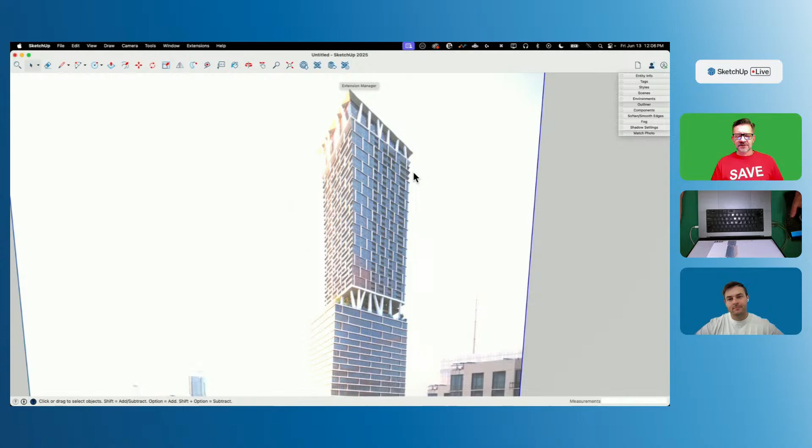So then as we continue up, you can see that this flares out into kind of a crown type thing here on the penthouse level. But yeah, a very cool tower - there's a little bit of distortion on this I think, but we have a couple other images I want to show real quick.

This is more of a ground level image, so I wanted to get a shot of this, like I said, what I'm assuming is the commercial area down here, but you can kind of see how that goes up. Very cool architecture, cool building. I do like these offsets - a little bit of texture rather than, I think we're years past the point where you just do a straight glass facade on the outside of a building. Nobody wants that, that's boring. This offset grid is kind of cool.

So there's a couple reference images, we'll just stick those over here on the side so we can look at them if we need to. Actually, I'm gonna use one of these as a watermark - I'm just gonna throw a watermark up here on the left.

To put a watermark, and I haven't done this for a while - if I go into my styles and edit, this second to last tab right here. Looks a little bit different in Windows but it's a very similar layout. The second to last tab is watermark. In here I can hit plus, and then on my desktop I can grab the image I want to use as a watermark and open it. And that shows up, that's good. We're going to stick it in the background.

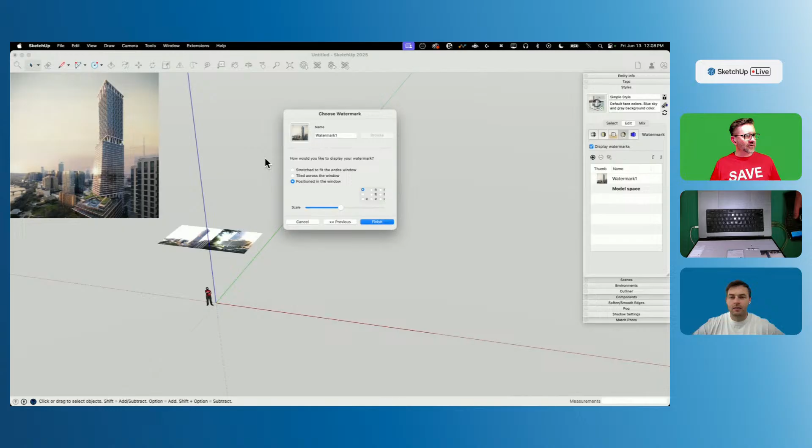Where did it go? That was interesting, I guess we're doing overlay, background - yeah, of course I'm doing overlay. I want to be able to see it all the way for sure. I'm going to position it in the upper left corner, and make it not huge, but something I could glance at and go, okay, that looks about right against my model. So it is an overlay, it will cover up my model - see, my stuff's going back behind there as I move around. But if I was really worried about optimizing space, I'd probably go in and chop this down a little bit.

I don't need all this extra space, but we're good for what we're doing. Yeah, there we go.

I'm curious how you're going to approach this, because at first when I was looking at the skyscraper, I was thinking we have a bunch of floors on top of each other, so we could probably just make a couple components and stack them. But the tricky thing is these shapes are concaving upwards and it's interesting. So what are your thoughts?

There isn't a single floor that's the same shape. This is going to involve arcs.

I think this is a model where level of detail would play a very important part, because I see a way that you could do this. I could probably finish a version with the proper geometry in about 10 minutes, but it wouldn't be detailed—that would be like projected textures, cutting some corners. To get the detail in, we're gonna have to get creative and possibly use an extension or two.

I have some thoughts, but I don't want to ruin it. You've got to stick around for the whole stream to find out. That's how they tell you to do it in YouTube school—promise something amazing at the end. You won't believe what happens next.

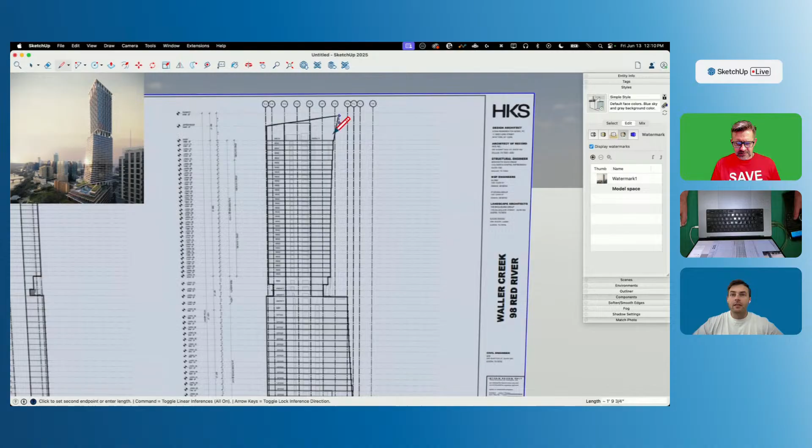Matching some texture sizes. I don't actually need dimensions off here—what I really want is just these two images. What did you say was the total height of this building? It's 1,022 feet.

1,022 feet. So I have what looks like the ground plane right here. I'm going to draw an edge from here to here, take these and put them in a group, go into that group, and measure that edge from here to the other end.

1,022—yep, that's right. 122, that's missing a zero. 1,022 feet, enter, resize the group.

So now these images are full size, and I can believe that because look at 6'2" Aaron right here—he does not stand up to that. That seems believable to me. Okay, cool.

I don't actually need that edge—I just wanted something to measure off of.

All right, so I'm going to take this—I did some stuff to it already. Better come in here. We don't actually need it in that second group, so I'm going to explode that, and turn it back to flat because that could cause some pain in the future. Here we are on red axis—okay, they're flat. All right.

Now what I want to do—you can see here if I look, this side is straight, with an angle cut right here, and then this straight side has that arc going up. It's shallow, but as it goes up, maybe these two are the same, but mostly every one gets bigger and bigger all the way up.

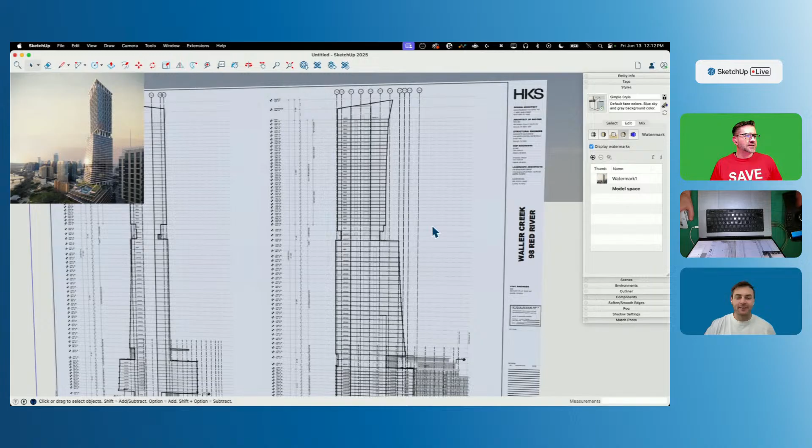Let's be honest, Austin's great and all, but there's not a whole lot to see out there, so I don't need to be too high up. Apologies to anybody from Texas—no, I'm kidding, I really like Austin, I think it's a fun place. Great food scene, good music, good college atmosphere. It's a fun place.

All right, so there's a couple ways I'm thinking I could do this. What I will probably do is use solid tools to create two profiles.

We'll create a profile from both sides and then extrude them. Then we'll overlap them and make one solid from those two outlines. I think that'll be the quickest way to get started with this.

Then we'll talk about this grid, because I think the easiest thing to do with this grid is going to be to take that grid and model it once, then cut it into the different sides, and use something like joint push pull to then pull the sides out. I think that's going to be the quickest, easiest way to do this.

Yeah, I'm going to see how that works. No promises. Actually, yeah, I'm promising that's what I'm going to do, but I don't promise it's going to work. Well, we'll see. But joint push pull is a good call, I feel like that's a good one. I should see if I have that installed. Hold one moment please. Yes, I do. Okay, we're good, let's move.

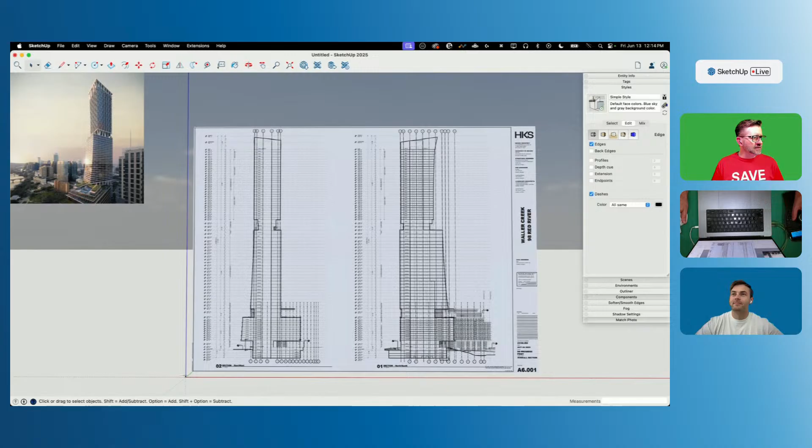All right, first thing I'm going to do - well, I've already done some first things, this is my next first thing. I'm going to change the color of my edges to something that stands out amongst black and white, so I'll grab this bright red color because I want to come in here, and I'm assuming this image - and it's not a high quality image...

You guys might already see that these points are going to line up pretty well. Nope, ish - look at that, right off the bat something's not quite lining up. Okay, so it looks like that side is higher. This may actually be how it is, because I might have a section here and a lower part here, so we'll play with that and figure out how that lines up. It'd be a shame if this was straightforward and everything worked.

All right, so here we have this bigger chunk - you're not going to earn your ice cream if it comes together easily. That's right, what's the deal there?

All right, take this one straight across, see where this hits. Okay cool, so that's nice, that stuff all lines up. And then down here... right, and then we're going down to, this is the ground plane, so I'll get this in. This is how far we're going to model down to. And then see, I got a step right here - fairly big deal, yeah, okay.

So all those edges, all those locations line up vertically. That's good, that's cool. So right here I'm going to start, pull it straight down. I'm going to go straight down rather than snap to the end because this end is kind of arbitrary, so if I stay on the blue axis they'll cross and I can get rid of those two pieces. I'll do the same thing here. I'm just going to follow this profile for right now and see what happens.

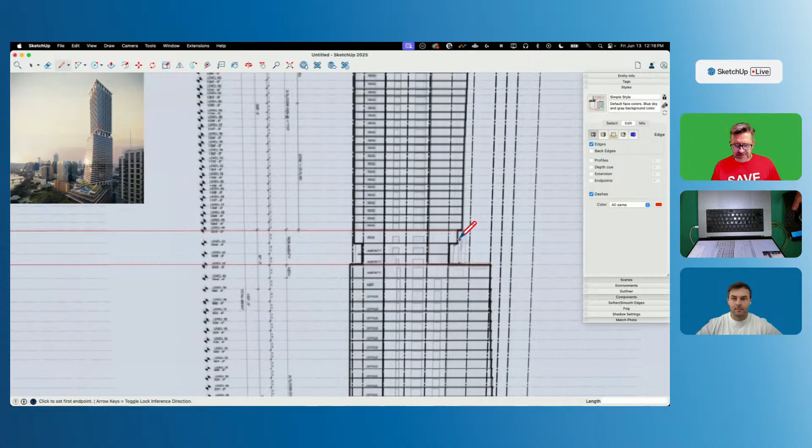All right, and then down here I'm not really sure - obviously there's steps here, so maybe I'll go do this side too real quick. I'll take this side up from here down to here, from here up to here, and then it goes like this, and then I'm going to use an arc from there down to there, and then just kind of - it's not a crazy deep arc, but there's a little bit there.

Okay, there we go, that was nice. Cool. Why didn't this close over here? What's the deal?

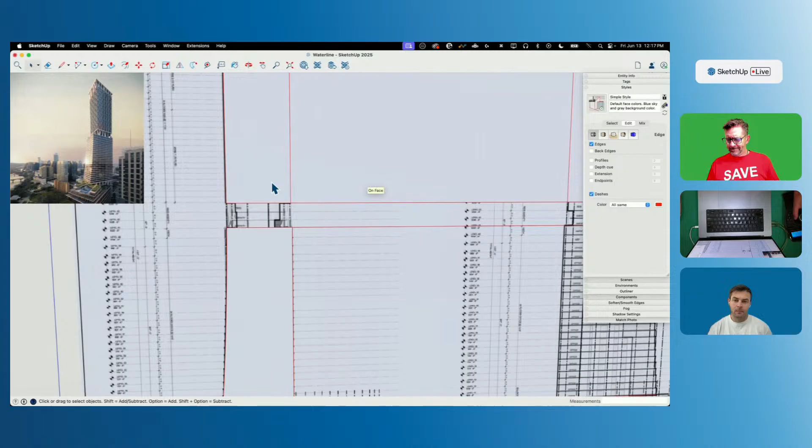So the reason this isn't straightforward to me is I'm kind of wondering if I need to be putting some of these actual levels in. So come into right here, down to here, here up to here, and then taking that line straight on across. I can see this little step out right here - I don't want to lose that.

Speaking of determining the simplicity or complexity of the model, John Ross in the comments is asking: is it truly an arc on the side of the building, or is it that all the individual floors are slightly stepped out?

What do you think about that? I do think that the floors are stepped. So I do actually think that's what's going on here, but I kind of wanted to see what would happen if I continued modeling this way anyways. If I was going in here, it does look like they step a little teeny bit each time, which I guess we could still do. But that will... okay, so to do that, again, this comes down to level of detail.

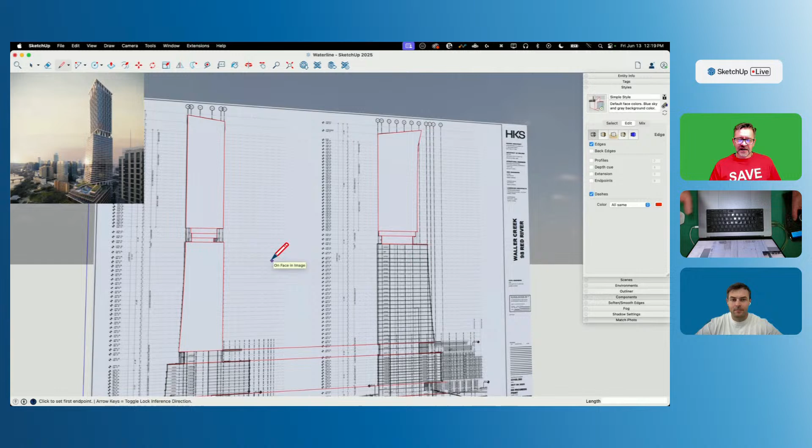In our hour and a half model, I'm not going to detail every level differently. I just don't have the time and it would be boring. So what I could do is determine the exact height of each of these floors, and make the step on both sides so that when I push the two pieces over each other and make the solid, those steps align perfectly. Because if they don't align perfectly, I'm going to have a big problem. That wouldn't be too bad. The problem would be...

Yeah, I guess we go for it. Well, one thing you could do is draw a rectangle essentially for the top floor, and one from the bottom floor, and then divide it by the amount of floors, I guess. That should give you a pretty smooth result.

Yeah, so if I go from here to here and here to here, right? That cuts it. So now this edge and this edge are the same. And in that I have... oh, I'm gonna lose count. 1, 2, 3, 4, 5, 6, 7, 8, 9, 10, 11, 12, 13, 14, 15, 16, 17, 18, 19, 20, 21, 22, 23, 24, 25, 26, 27, 28, 29, 30. So hey, there we go. Nice, does look like a round number.

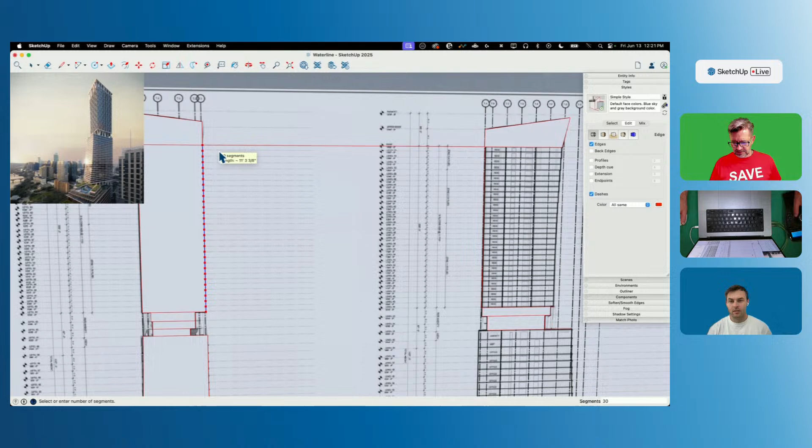These are not symmetrical. Maybe this is a maintenance building or a less expensive floor. It looks like they're different, but that could be the image too. So I'm gonna say there's 30 even floors for this. I'm gonna divide it. I can slide this around and see what 30 looks like. Easy 20, 30. That's pretty close to my dots. All right, I'm gonna go with it.

So now what I could do is take that over to where I want that first one to be. And I broke the wrong one. I really should have broken this one instead. So let's just do this. I'll grab that line right there, option copy that to right here. Because this one's the same, so I don't have to break this. But then I can come over here and put each one in like this.

Okay, this is a speak-amongst-yourselves time, because while you do this, let me share some fun facts about this building. One thing that's really cool about this building is that the structure was designed in Tekla, one of the modeling softwares under Trimble's umbrella. Trimble Connect was used very heavily to collaborate on the model and identify issues and solve them before development even began. So that's pretty cool. Yep, love seeing our stuff get used. Exactly how it's supposed to be used. That's awesome.

Probably to a degree more accurately than what we're doing right now, but I would think so. I would hope so. I bet they spent more than 90 minutes on it. I'm gonna hang my hat on that. Otherwise the residents in the apartment would start talking to each other and be like, well, my ceiling's like 10.67 feet tall, and oh, yours is 15? Wow.

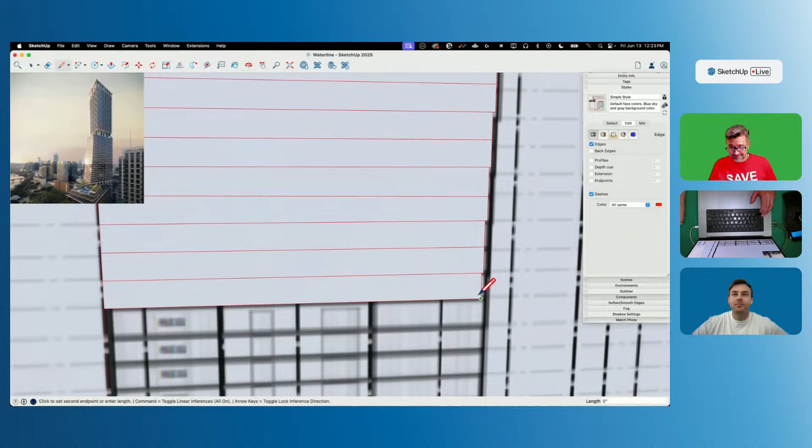But yeah, so the building is supposed to be finished in August 2026. And like we said at the start of the stream, it's going to be the tallest building in Austin and the tallest building in Texas, and the tallest building in the southern United States until the Waldorf Astoria Miami is complete. So maybe we'll do that one next. I don't know, we'll see.

Nice, all right, that made light work of that. That was not as bad as I was thinking it'd be. All right, I'm gonna get rid of these edges right now because I just want that cut.

So I could do the same thing over here. Let's see, I got 1, 2, 3, 4, 5, 6, 7, 8, 9, 10, 11, 12, 13, 14, 15, 16, 17, 18, 19, 20, 21, 22, 23, 24, 25.

So you can see they are pretty close at the bottom, but as we come up, we have some different size steps. So I'm gonna double check that. 1, 2, 3, 4, 5, 6, 7, 8, 9, 10, 11, 12, 13, 14, 15, 16, 17, 18, 19, 20, 21, 22, 23, 24, 25.

Yeah, it kind of looks like it's getting increasingly taller each step. Well, take that, rich people, you don't get your big big floors this time. Yeah, but tall ceilings, what are you gonna do? That's right.

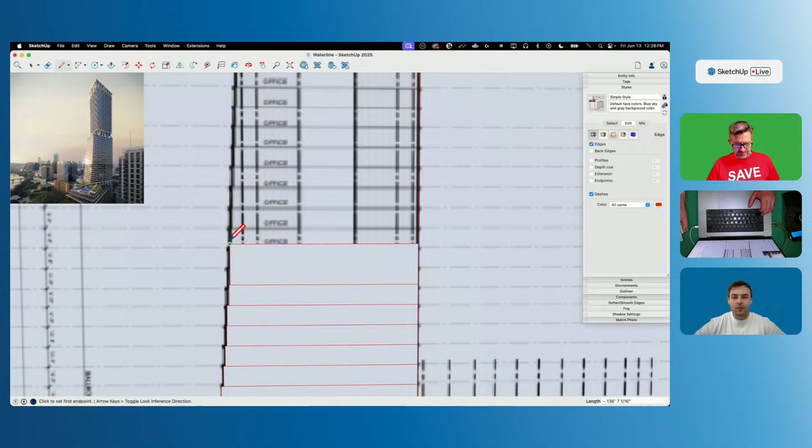Well, I guess it's more interesting to talk a little bit about what you're thinking of doing next. So once you have all these individual floors built out, you essentially have the side profile or the elevation of the building. I'm curious, are you going to push pull everything manually? Are you going to duplicate it on both sides of the building so that it's a hollow building on the inside? What are you thinking?

So I'm thinking I'm just gonna get a solid plane here, right, an outline. One, two, three. And then I'll use solid tools to kind of get the overlap. I can't remember what that's called. Is it the split? I think so.

I might be consolidating some floors together here, but I want to get the profile from both sides rather than push pulling a bunch of stuff one level at a time. Like I said, that's what I did not want to do.

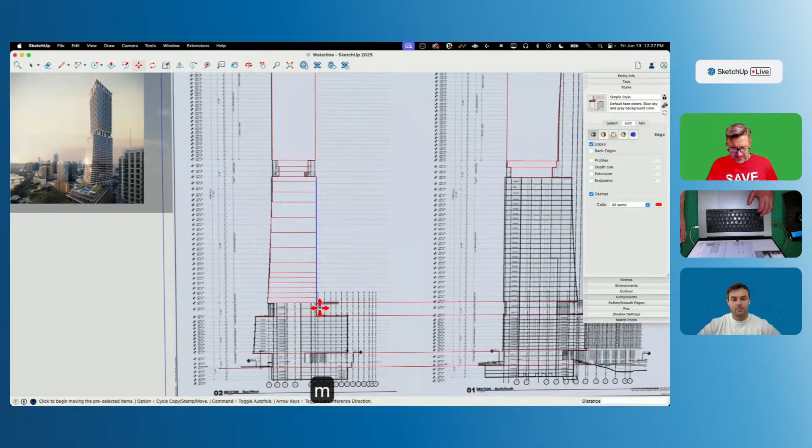All right, there we go. So something - whoa, whoa, whoa, whoa. Actually, undo that because I want to use those same edges as inference or as reference. I'm going to go like this, option copy that right over to here. And then I got to do the same thing, unfortunately.

All right, so start at the bottom where it's bigger. But yeah, I was thinking because we've modeled this way before, usually it's a little more organic or curvy shapes where we can kind of model a top view, a front view, and a left view, and then overlap them all and keep the piece in the middle. Something similar to that. I think we've done animals or motorcycles or a Vespa or an airplane maybe, with the same process to just get that preliminary massing done rather than trying to figure out how this thing works one piece at a time.

Yeah, that's an interesting approach actually, didn't think about that. So you'd essentially be putting all of the faces together and then drawing like a massive rectangle that sits in between everything and then using the solid tools to cut the remaining piece. Smart, that's pretty cool.

Well, we'll see, yeah, we'll see. We will see, folks. At this point, we're more like - hmm, that's an interesting take, let's see how that works. That's kind of where we're at, I think.

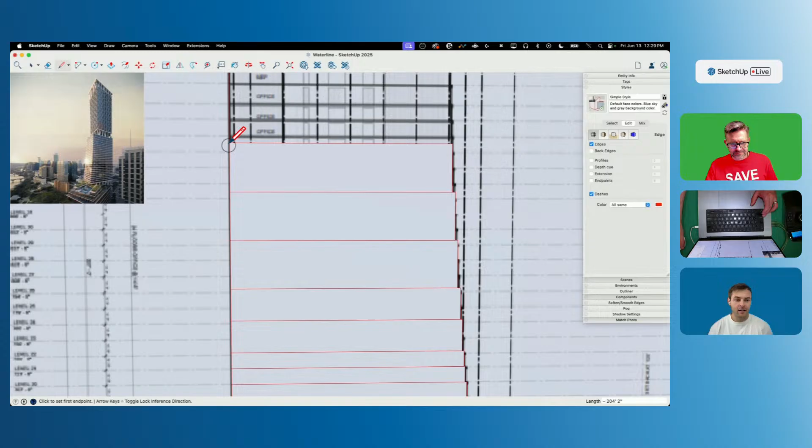Undeniably, it's looking pretty good already. We had a comment in the chat asking if we have a plan view, and I just briefly looked online and I could not find one. So sorry, Aaron. That's okay, I was actually wondering that because of that lower level, which I'm assuming is like the commercial section.

Down here it's weird because it goes a totally different direction, turned like 30 degrees from the main section. I'm really not sure how to do that, so we're gonna really focus hard on this piece and then see how much time we got left. We're gonna let the timer run out on this, probably. All right, so I'm gonna bring this in like that.

Hmm. Yeah, it does. Don't look like I want it to. It's a fairly tricky building though.

It is fitting that our colleague Matt suggested doing this building and then left on paternity leave. Conveniently. That's one way to do it. Thanks Matt, we miss you Matt. Congratulations. Well, it's not officially happened, but he's on baby watch right now, so it could happen anytime, folks. Matt could be babying it up as we speak. We don't know. Stay tuned.

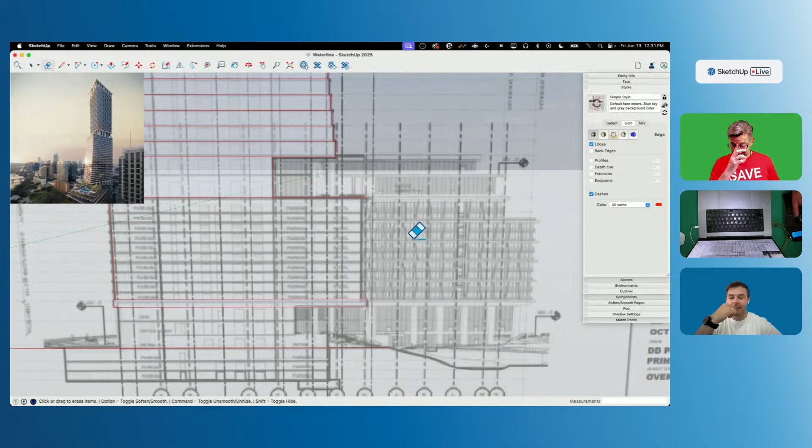Could you imagine the amount of actual plan documents and whatnot that go into this building specifically, and the amount of engineers that had to look at the structural design to sign off on it? Think about what it takes to build a 1,000 foot tall building. I think about the amount of plans that go into a decent size mountain home around here, because when I was doing design work, it was primarily for custom homes in the Rocky Mountains. We would have plan sets that were like rolls this big, and it was a single family home. I just look at stuff like this and, yeah, you'd need a forklift to move those plans around.

All right, so I'm gonna take this down to the ground where what I marked is the ground plane. Yeah, like that for now. All right, and I'm just gonna clean all the edges out so I get one profile.

Beauty, nice. Over here, same thing, I'm gonna take this down. Make sure I'm inferencing down to the same spot. Take that over. I can't tell what's going on here.

Hey, we're 30 minutes into the stream so far. This profile is looking sweet. If I can pop this out in the first half hour, I think we'll be good.

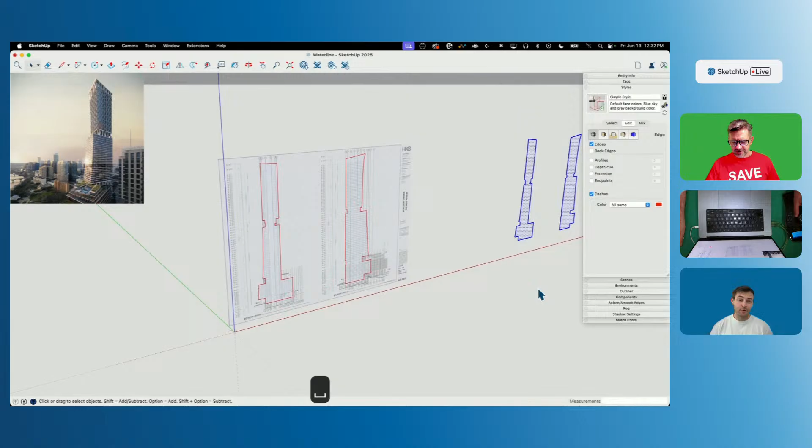All right, so what I'm gonna do is grab both of these and make copies over here. Of course, don't forget to save. Maybe. Look, already done. Nice, good call everybody, thank you very much.

I can't see my shirt, so you guys got to read it to me. All right, so I'm gonna take that one. Actually, well, I ended up with a bunch of edges here, so I might do this. I might grab this and weld it real quick, but I don't know, is that gonna mess with something? No, I don't want to do that.

Unweld, bring it out, and then I turned X-ray on at one point because I was tracing off of that face there. All right, that's good, that'll work, I like that. And I'll take this one, same thing, just pull this out. And then these are actual steps, these aren't.

All right, I think that's everything. So I'm gonna grab each of these, triple click, make a group. Triple click, make a group. All right, and I'll take that group, spin it 90 degrees. And this again, it's all at the same height. It lined up horizontally, so all I should have to do is slide this like this. All those floors should connect right together.

So right here, that lines up. Here lines up. This deck lines up. Down here, that's the same height. That's the same height, this little step right here. Let's scoot it back just a little bit so we get a better overlap. This little thing right here lines up. Perfect, so as far as I can tell, that's good.

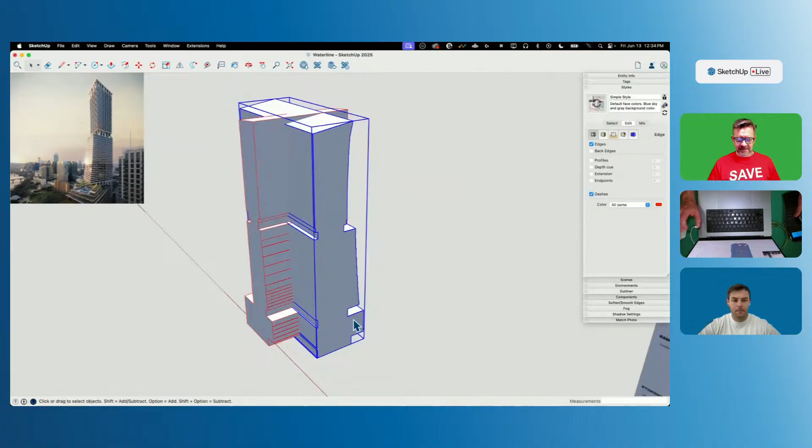I'm going to take these two and option scoot them over. I learned from Tyson on this one, it's good to have a backup. About to do something stupid, make sure you make a copy and save. Okay, that being said, let's do something stupid. All right, I think it's intersect. I think what intersect will do is give me just the geometry where the two solids overlap. So I'm just going to hit it.

There we go, look at that. Yeah, beautiful. All right, so let's look at what that did. It did that. That's pretty cool.

That looks good. And you can see that the roof does slant, which I think it does in real life too. So nice job. I'm guessing because we only had two sides, we could only see two of the sides. I'm guessing something more like, if I come in here, I'm thinking it's probably more like this, where it comes down in two angles, something like that. But that's a pretty nice, cool looking building. Agreed.

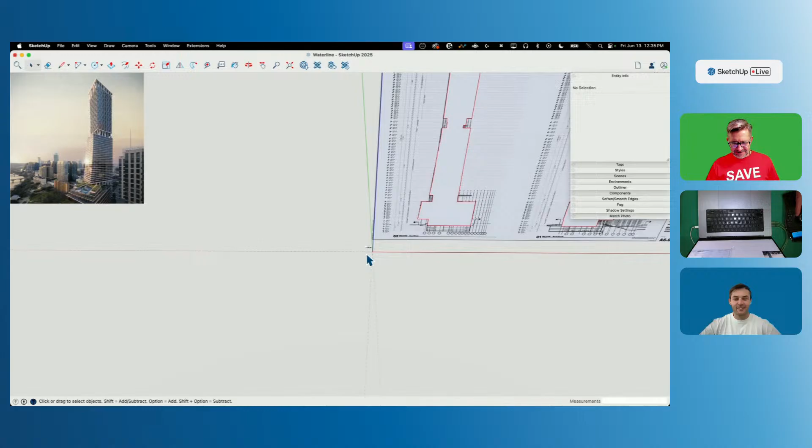We will ignore the fact that the bottom of the building juts out at a completely different angle, but I'm working on that with my brain, trying to reconcile this. What? I don't even know how that happened. Yeah, where did my... consider it a design flaw. I'm looking for my reference images. They are here, all right.

Let's scale these up so I can at least kind of look over at them. All right, I'm going to grab that, that's a new solid group. So if we look at this thing, it looks like that's the angle we're looking at it from. Yeah, this is where this cut down here is an orthogonal cut against a non-orthogonal building, so that was kind of chopping through like here and then here. So that's where we got that weird chunk on the bottom.

I'm kind of tempted to say let's just knock this chunk off. Yeah, and let's model this piece from here on up. If we have time, I might go searching and see if I can find some better images of what's going on down here. I think it's a cool section, but like I said, everything I found was about the tower and not so much this lower level. Which I think is okay, because I think we got plenty to do here.

All right, let's detail this thing. Trying to think if I really...

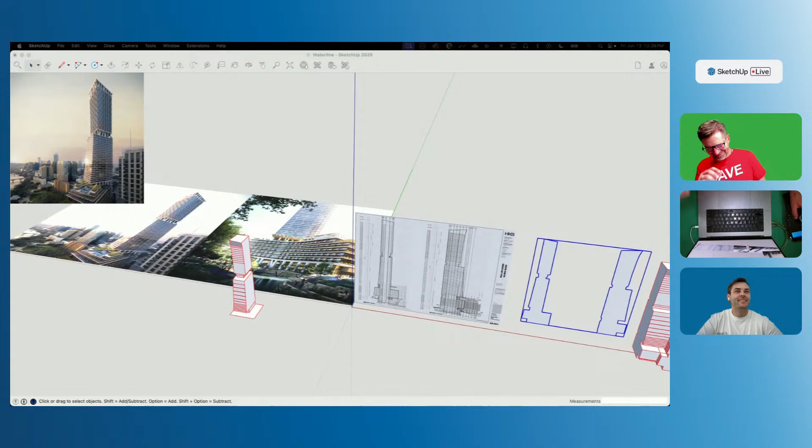Um, yeah, let me... Forums.sketchup.com, official plug. Just briefly create a forum account real quick. Oh I know, boy, I know. Hey, whatever gets it done, man. That's cool, that'll work, all right.

Let's look at a couple of things. So top down, it does look like we have this inset here. That looks right. And then we got this cool non-symmetric post work going across here, holding up this middle mezzanine section. That's awesome. We got the same thing going on up top, but I did not model that.

So I'm kind of thinking what we'll probably do is I'll come in here. I think at this point I got to get rid of these red lines too because they're making me feel like I did something wrong. I feel like I'm being shamed by the color of these lines. So I'm going to come in here to my styles and just set them all back to black, or licorice if you will. All right, so that looks cool.

And then I think, kind of wondering something about this right here. So these are not in plane. You can see if you look down here, these two points end up lower than if you connected these two points. So these two would have to vertically move up in order to force this all into line.

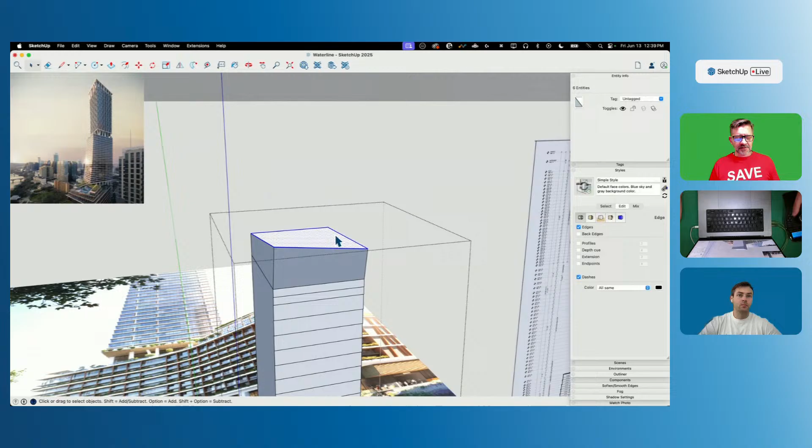Now I actually have a tool that will figure out how do I make that all one plane. And again, I admit right now, I'm not working off of a set of structurals or architecturals or anything else. I'm straight up trying to make this look good as far as I could think how it should be. I don't see a reason to really have a break right there. It's already sloping, so I want to try to get this as a flat plane.

So a tool that I use every once in a while, it's part of the extension Vertex Tools, which I wonder if I have it installed. I'm pretty sure I installed it, yeah, Vertex Tools. And there is a tool in here called Make Planar. And what Make Planar does is it takes 4 or more vertices or ends of edges and puts them all so they're in a plane.

Not necessarily flat to the blue-green plane or the red-green plane or anything like that, but all in plane with each other. You can see how this is up high, I can see that poking up past. If I hit Make Planar, it's going to shift them. There you go, so they are all in plane now, and I have one flat surface there. If I look at it, there it is, perfectly flat.

The reason I want to make sure I do that is because I'm going to want to take these edges and push them in to make this recess where I can put my posts around. That's going to be a lot easier to work off of a flat plane rather than what that thing was before.

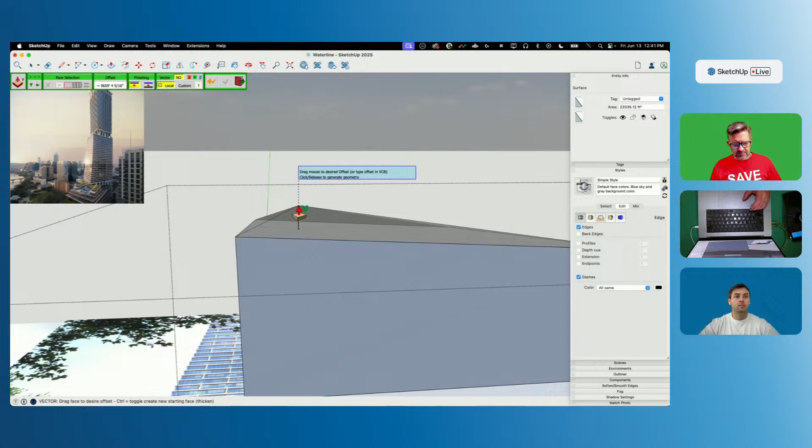So I think I'm going to grab this, we talked about it, I'll go ahead and use it. I'm going to come in here to Tools, Fredo Collection, Joint Push Pull, and I'm going to do a vector push pull because I want to pull this straight up. Normally a push pull is always 90 degrees to the surface, normal to the surface. So whatever angle a surface is at, pushing something off normal is how push pull works. But with this, I can actually grab a surface and pull it and tell it where to go. I'm going to go straight vertical, so that's going to go straight up instead of normal to the surface.

See it there on the edge? See how this goes vertical? And then let me bring these other pieces in slightly.

Might as well just bring that toolbar up. Let's go to Tool Palettes and find Joint Push Pull. All right, I'm going to joint push pull a couple of these pieces in. Oops. Yeah, I do love joint push pull.

It's super helpful. Kegi in the forum posted the same photo that I am waiting for approval to post, so he beat me to it. But yeah, it's a fantastic image that really shows, I think, the design from a nice isometric viewpoint.

Pull this in, yeah, we'll say like 6 feet. And I'm making a little bit of an overlapped mess here because I'm pushing in geometry that was never meant to.

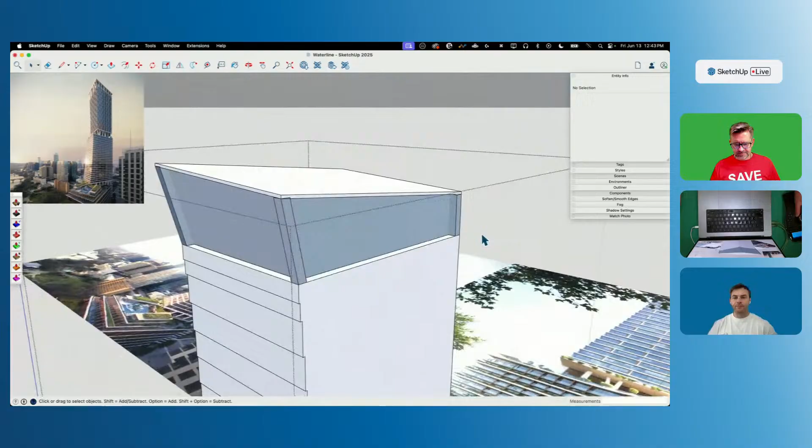All right, so hey, I made a mess. Columns, I made corner columns, I made a mess right there. But I'm okay with that because I think cleanup's going to be pretty easy. I think what I can do is just grab all of this, right click, intersect face with selection.

Any place that any of those two overlap, they're going to get a face now. I think I can just come in and chop off whatever's on the corner like this. And we'll be back. Whoops, too much. I deleted too much, there we go.

And then I think I might have to do some cleanup at the top. I may have just actually made a terrible mistake. That is always possible as well. Oh, that's how you learn. You'd think. This is not the first time I've done this, so, oh man, it just keeps getting worse. I'm gonna back up.

Ripcord. Okay, let's try that again. So the issue is I can't. The reason I'm having an issue, I'm having a moment here, is because basically nothing's in plane, it's all out of plane. It's not a bad thing, it is what it is, unfortunately. So I'm going to try this.

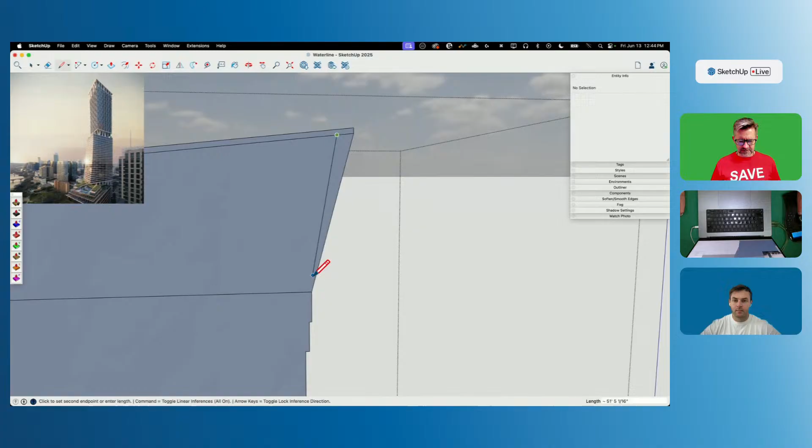I'm going to come this way 6 foot, and I'm going to draw an edge right here to here, 6 foot. I should have, there we go. So there we go. And then I'm going to come over here, do the same thing. Come this way 6 foot. Come this way from here to here, 6 foot.

I don't know, I'm experimenting at this point, I'm not sure what's going to happen. So I'm going to get rid of those faces, and I'm going to tie these two together. And I'm going to flip this way and tie this together. Oh, that. And it didn't close because of that angle. I'm actually creating, I'd have to create a face like that.

But before I do that, I'm going to step back in here also. I'm going to come this way 6 foot.

There are situations that go against your whole ethos, you know? That's the problem. I gotta figure out if I want to stay on brand or make things easier on myself. You know, that's what I gotta live with here. Gotta play this whole thing.

That's right. This is one of those spots where, like I said, if I was actually designing or doing any kind of design work with this thing, I'd hope to be working off more information than an isometric render. But it's cool, it's not painful. These extra couple steps didn't hurt to do.

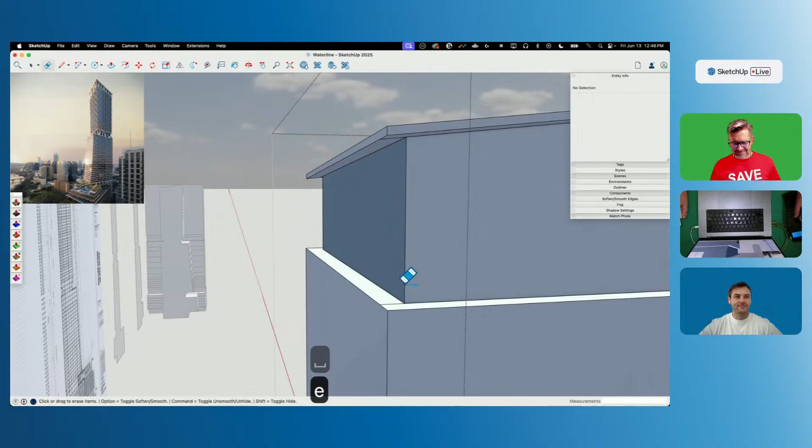All right, so there we go, that looks pretty good. And then again on the pieces that didn't line up perfectly, these weren't perfectly straight or something like that - that's okay, because I'd probably just come in here, connect these back up like this, and then smooth those back over. And I got my recessed area there.

There we go, I'm struggling a little bit. I don't know if you've hit this yet, Justin, but depending on the environment I have set up, the sun hitting the white face versus it being ambiently lit through the color of the sky looks pretty close to the backside. Yeah, it looks like the faces have been reversed.

Well, I'm a little surprised that in an instance like this you're not turning off the environment, but I guess you just love that cloudy sky. I just like it, I just like the colors that come in. I know I'm working on white right now, but I like the way it looks. It's just what it is, that's just how I go. This is me now, this is just what I do. That looks pretty cool.

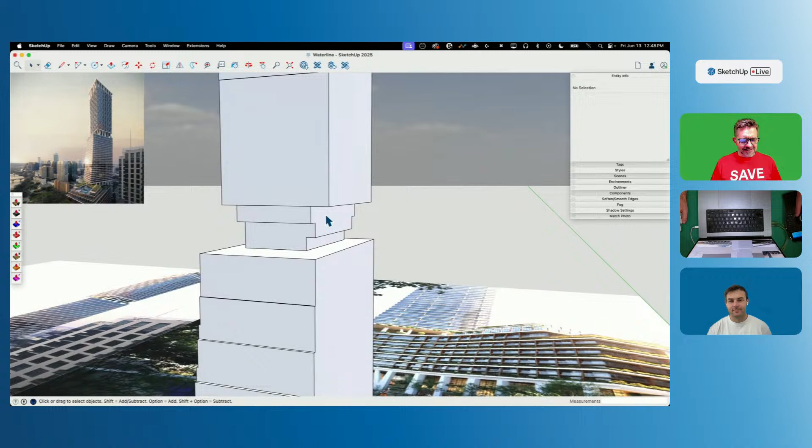So I'm gonna do a couple other things here. Maybe let's work on this web - I'm gonna save this, this is closed in. So we have this webbing shape, I'm calling it webbing, it's not actually webbing, but it's this lattice work, I don't know what you want to call it - this stuff. I want to get that on the side of the building.

So I'm going to make a single component to start with. That component's going to go - I'm going to come here, and what's our floor? 11, so I'm going to come down 12 inches. I'm going to take this back this way, green, going long both directions. All right, come up 12, down here. All right, there you go.

Grab that, make it a group temporarily. And I'm going to option copy that down below. All right, so that should fit - this is the biggest side of the building, so that should fit everywhere as I need it.

All right, then I'm going to look in here and see, okay, which side is this? That's this side, actually - 1, 2, 3, 4, 5, 6. What, the smaller side has less? That doesn't seem right, that's probably just a rendering thing. I'm going to do as many as I darn well please - how about 4? Okay, four-ish, this is an interpretation.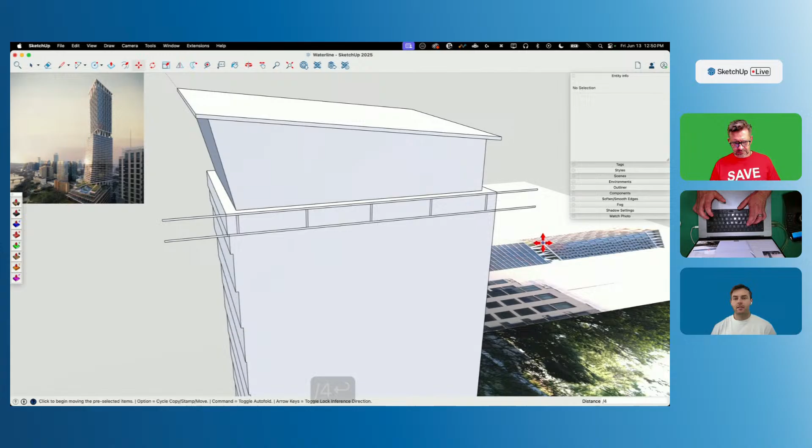There you go, all right, that looks okay. Cool. Now I'm gonna grab this, this, this, this and this, and option copy it straight down. I'm gonna come to the middle right here and slide it over. I actually have a middle point here, so I'm gonna do this.

I'm gonna make temporary geometry just to inference, that way I can grab the middle of this point. I can drag it this way to the middle of that. Get rid of that. All right, there we go, that's gonna fit, okay cool.

So now I'm gonna grab all of these pieces and make them into a new group. Go into that group, grab all this, let's get rid of everything else. I don't need to see all this, I just need this, this is all I need. All right, I'm going to right click and explode it all.

This is a pretty simple piece of geometry, so I'm just gonna manually erase some stuff like this. How would you do it if it wasn't a simple piece? There are some, I could probably use cleanup. Cleanup, yeah, I would probably use cleanup. Cleanup will go through and merge all these into one piece.

The issue I run into with cleanup, let me see if I can create my issue. All right, there we go. So see how I left a couple of edges along here? It's still all one piece. So cleanup doesn't go through and make sure any redundant edges are gone, it just erases enough edges so that this all becomes one piece.

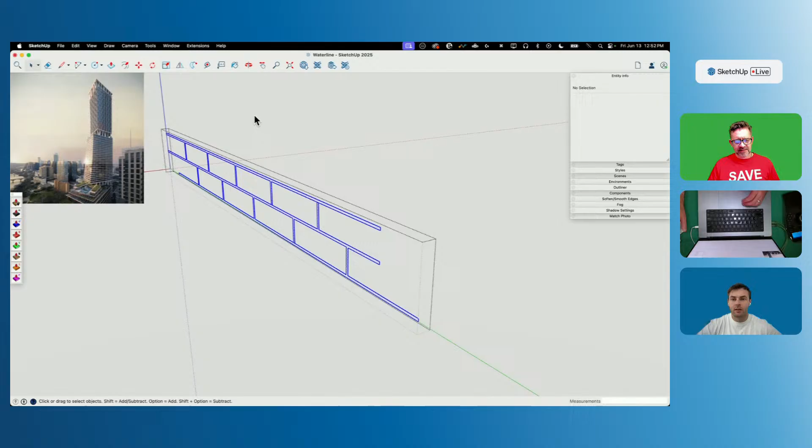So I find with cleanup, it works great, it's a great start, but then sometimes I still got to come in and get rid of these extra little edges if I don't want them. Or the other thing I could do is grab just this face, Command C to copy it, then delete everything, and then paste in place, and that'll bring just the surface back without the extra edges.

I lied, that just came back. Yeah, so I'll just delete them. Okay, I thought I had something cool there. That was interesting, I did not know that would happen. All right.

So this is going to work for the flat sides. These sides over here, I'll have to do a little bit more work, but for right now, I am making things up. So I'm going to grab this one, option, bring it straight over here to this side. Come in here, what I'm trying to think now is do I want to push pull it now.

Or do I want to copy it, group those flat pieces together, and then push pull them? If I push pull them now, they'll be solids, so it'll be easier to group them back together. I think I might do that. There's no world where you would want to turn this element you've created into a component.

Well, I mean, yeah, we talk all the time about how components are super important and why you should use them. But let me show you why I'm not bothering. I'm going to pull this out 6 inches so we get a 3D piece. I'm going to take this one and grab it.

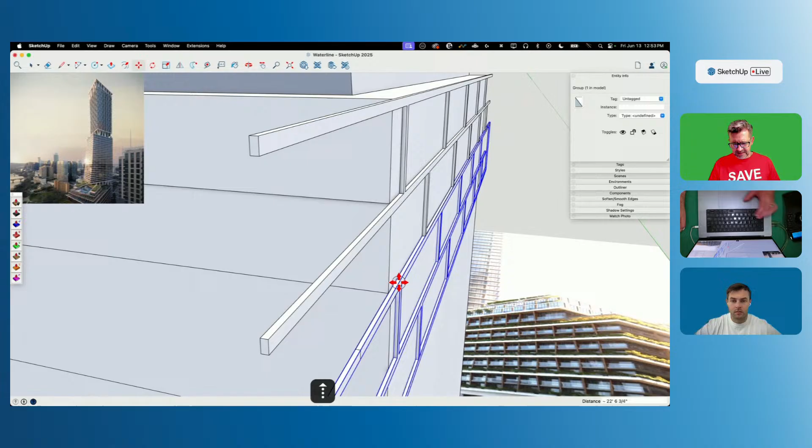I'm going to option shift, or vertical copy down to here. I'm going to say do that 15x. That's close, and now I have them. So the first thing I'm going to do now is take these and outer shell them, so I have one solid.

Oh, son of a gun. Yeah, if I had done that in components, it would have been way easier to fix. All right, I'm going to undo a couple times. I'm going to come into this and take a look at what the problem is.

Looks pretty good, so let's ask Solid Inspector to take a peek. Solid Inspector... I have an internal face, so we'll fix that. All right, let's try that again.

So as I was saying, yeah, it would be ridiculous to make a component 14x. There we go. Because the first thing I'm going to do when I copy these perfectly created solid groups over here is join them together. So we're going to go into Tools, outer shell. Now I have one solid piece there.

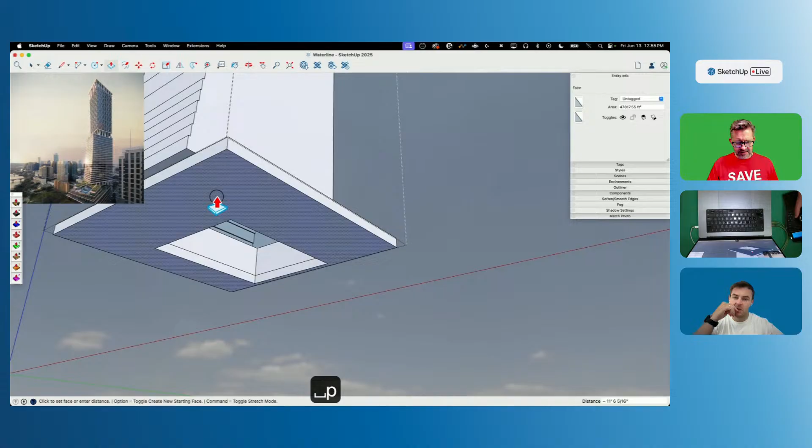I could take that solid piece and, let's get it all the way cleaned up first. I'm going to take that piece and slide it in like that. This is still a solid tool... no it's not, what did I do? Oh, there we go. Here's what I'm doing, I'm going to give this a little bit of a podium to stand on like that. Oopsies.

And then you're going to use solid tools again to basically cut that piece. Exactly, so let me figure out what's going on. I got some loose geometry inside probably. Yes, not one but two internal faces, twice as many. Okay, and then I'm going to say...

How do I do this backwards? Okay, here's what I'm going to do. Make a copy of this, slide it over here, and then take these two and use solid tools intersect again to get me just that cut off piece, which I should now be able to grab.

Whoop, whoop, whoop, hey Zoomy. All right, and then we'll take that, drag that straight across till it hits the face. And there we go, that should fit perfectly. And now we can also do is take that straight across to here. And we're halfway done with the top tower. Save. Okay, good thinking.

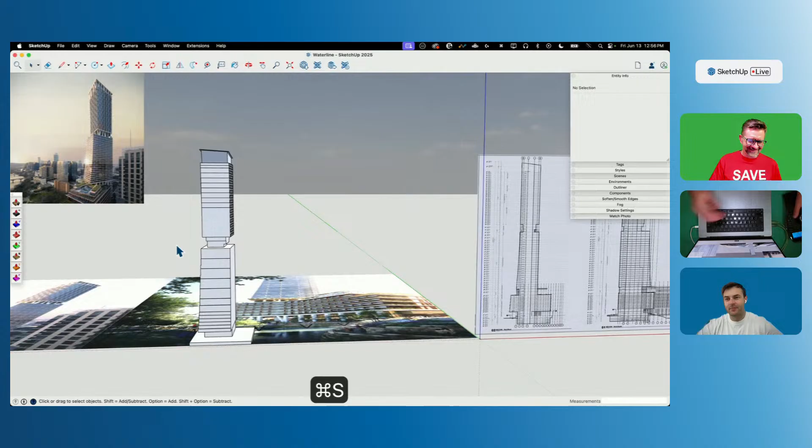And so how are you going to put that lattice on the curved side of the building? Are you going to kind of push pull it so it has more depth and then intersect it essentially, or? Well, I'm glad you asked.

A more important question is why didn't I copy that original lattice piece so I could use it again? Here's what I'm going to do. I'm going to grab all of this, Command X to cut it, and undo a whole bunch of times.

If it seems like I've done this before... alright, let me get rid of just this. Edit, paste in place, paste in place. There we go, and I have this. I'm going to save. All right, now I don't want to ruin it.

Let's start with the back. I'm going to take this. I'm going to make you wait for the answer to that question. It's not because I haven't thought of it.

That seems like a valid reason, but... You're like an expert chess player, you're modeling 15 moves ahead at any given moment. I'm glad you think that.

All right, so I'm going to line this up hereabouts. And then, ooh, that was pretty close to perfect. Look at that, about the same. I'm going to slide it over just a tish. There we go.

And then same thing here. Oh, not the same thing, because first thing I'm going to do is option copy that. Wow, what is... oh, I'm grabbing. So if you ever have this happen, right? So all I want to do is grab this and slide a copy over, but when I went to move it, I got some weird spot. I picked a spot off in the background.

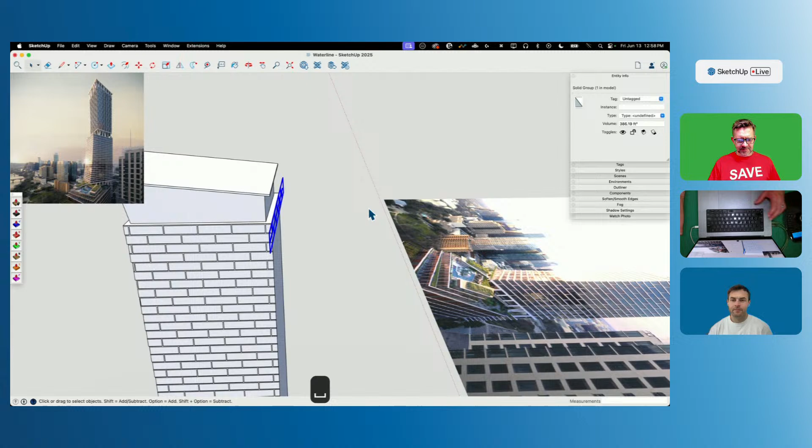So as I move my mouse relative to where my point was that I picked, a little move meant a lot up close. So if you hit that a lot, which I do, just try to pick something in the foreground. See how I'm inferencing this foreground? Now I know that I'm just moving it straight across. So if that ever happens to you, that's what's going on.

I'm going to grab this, option copy vertically to there, 14 times. That goes all the way down. Same thing I did before. Grab all of these. Tools, outer shell, one solid.

All right, now this is going to be interesting because if I take this piece and push it back in here and cut it the same way I did before, it's going to cut it back to here. So when I move it out, I'm going to have this little blank corner, this blank square right here.

To fix that, I could go into this group and push pull each edge, all 30 ends out one at a time, or grab the group and pull them out or something like that. But I'm going to go a little bit further. There's really no reason at this point to keep this and this separate. I mean, oh well...

Actually, there's a very good reason, and that is materials. Because I'll either have to color all of these pieces white.

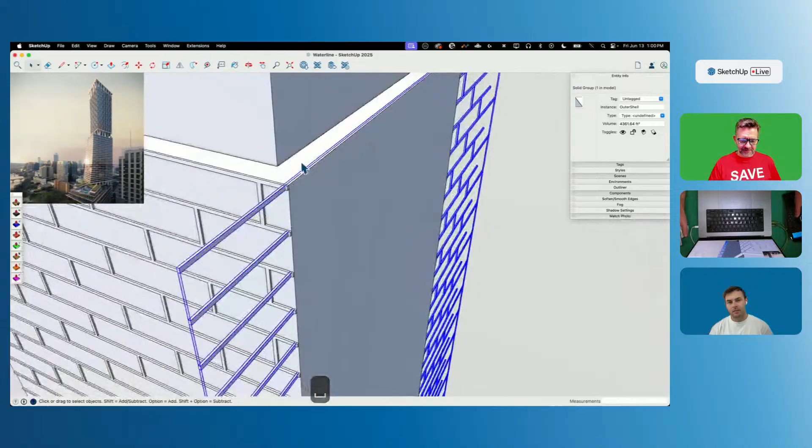Grab all of that, option copy that over. It's funny, I got this main structure of my building, and I'm basically just using it as a cutter now. I'm going to take that. I'm going to go to Tools, Solid Tools, same thing, intersect, just to trim off this bit.

And then I will take it and slide it. Come on, green axis, there we go. All right, so here's what I got, right? Oh no, that looks terrible. That's ugly. Oh, yeah?

Well, watch this, I'll show you ugly. No wait, that's not what I want to do. I'm going to grab all these ends right there, do a group select of everything, and then move them out 6 inches. I'm going to grab the same thing over here. See, there you go - the power of the select tool and the move tool.

Sometimes simple is best. People expect that from me, or never let down. Simple's good. All right, very cool.

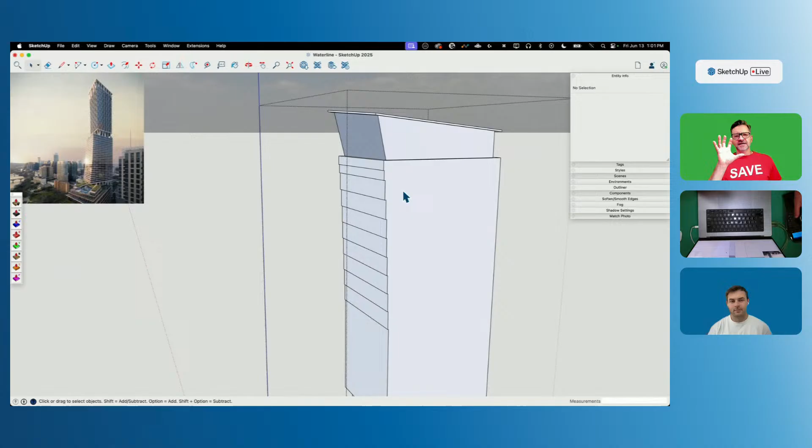By keeping it that way, I'm going to be able to come in here and color all of this with like a glass or reflective color, and I can keep these pieces on the outside white like they're supposed to be. It's just going to make it easier to add materials later on.

Now that we got that far, let's talk about what's happening here. So we have this piece. Let's go ahead and pull that straight back till it hits the face. We have a bunch of steps. And that's okay, that is okay. We can make that work.

Because we didn't do an arc, we don't have to worry about cutting it in and joint push-pulling it out. What we do have to do now is figure out how to take a bunch of these and push them up against the face and then keep them connected so we still have a solid.

So here's what I'm thinking. All right, so I'm going to take this one and we're going to go from here, make a copy straight down to here. And that one we'll just push right back.

We're going to have to do a little piecemeal design on this one. It's not going to be quite as simple as just get it done, you know. So yeah, this is where things get advanced. Advanced-ish, yeah.

So I'm going to take this line all the way across like that. I actually need these. I do, however - whoops, look at that. I didn't clean that up.

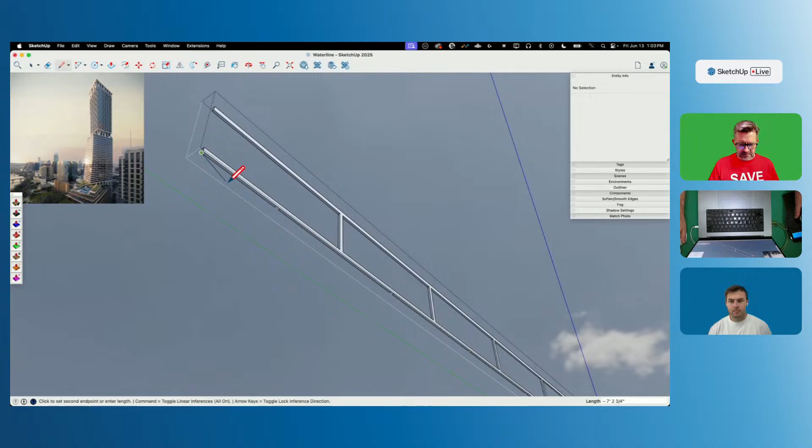I'm going to take just this section and copy it. Then I'm going to grab all this and delete it. And I'll go ahead and throw an edge along here to close that up. I'm making extra faces here.

But this is good, I'll do this once so I have this single - dare I say component? Probably would make a lot of sense. That's probably exactly what I should be doing, yes. But for some reason, I fight against it.

Here's what I was talking about before - I have all these pieces here. This is one piece, but it's all that stuff. If I use the extension cleanup, there's a thing in here that says merge faces. So watch these extra edges right here, and I hit merge face - see, they all go away and I have one face there.

That's what I was saying - that might be a quicker way to clean up. Obviously it was, that was much quicker.

All right, so now out in my own context, I'm going to say edit, paste in place. It's going to bring that single face back. And then I'm going to take that face, slide it back against this face, and then pull it out 6 inches. And then probably should make that into a group.

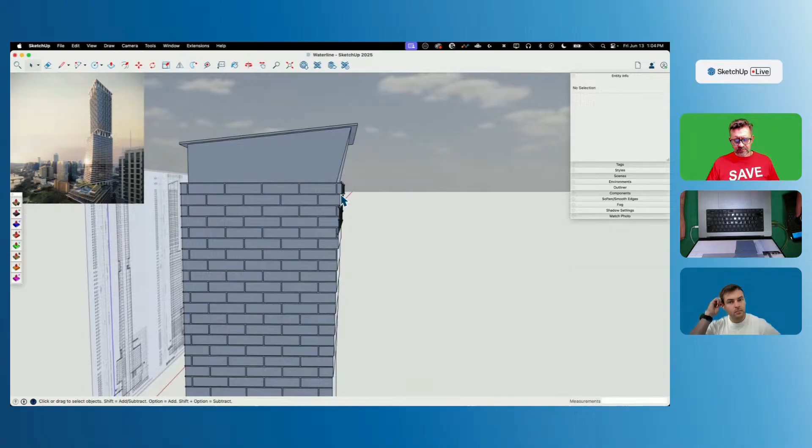All right, so now you see this is what I'm going to have to do basically - as I come down here, each of these will get some sort of pieces on here coming back one at a time.

Something I can do to save myself work later on is this building is the same width all the way across right here - it doesn't turn this way. Or maybe it's supposed to. I didn't model it that way. Again, working off of limited profiles.

But one of the things I could do now to make this simpler is I could just come into this one and let's unhide the rest of the building. I could just cut these now rather than doing an intersect with a big piece later.

What's the advantage to cutting it now? Well, because I'm going to copy these same two components—I have kind of a course A, course B, like bricks. I'm just going to copy those and move them down. They're all going to be the same length in the end anyhow, so I might as well just cut the first ones and not have to do it a bunch of times later.

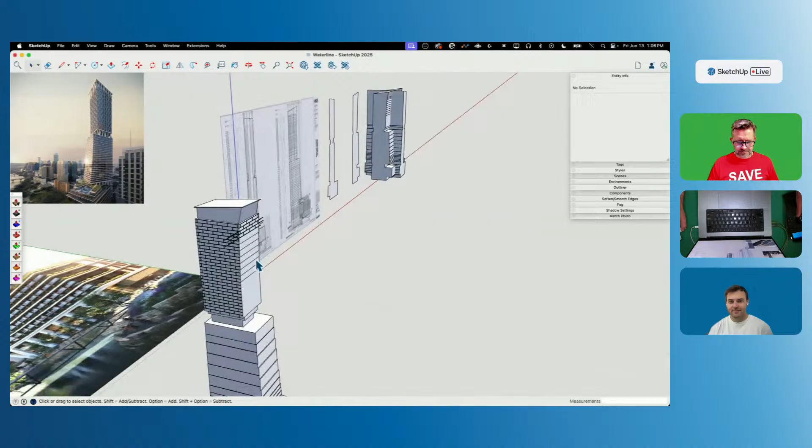So this is out far because of that. That's okay, I have an idea of how I'm going to deal with that. Come into this one. This drives me crazy sometimes—how sometimes you get this easy push-pull back to zero, and then sometimes it's like, nah. Probably some bad modeling on someone's part, or the mouse work. All right, let's see what's going on with these back faces.

All right, let's get rid of that. Let's get rid of this. Let's get rid of that. Throwing things away left and right. Beautiful. This thing right here—okay, so we need to do a little cleanup here too. I'm gonna come in here, get my stuff back.

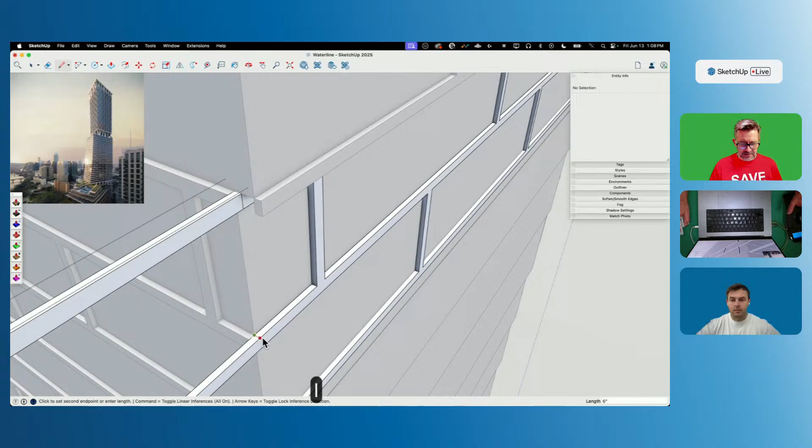Speaking of 3D Basecamp, which we had quite a while ago—it was really cool because we had a bunch of industry experts, heavyweight type guys. Some of the things we were talking about, like Justin Geis—you guys know Justin—talked a little bit about tips on how to get good at SketchUp, and one of the things he talked about was certain shortcuts to certain commands, and one of them was hide rest of model. And I think that is absolutely one of those that, because we talk a lot about...

Why didn't that cut through? Sorry, apparently I can't talk and model at the same time. That's not what I'm trying to say. We talk a lot.

He was talking about how we talk about using groups—like we harp on group usage, but we don't always talk about what to do when there's all this stuff floating around on my screen because everything's in all these groups and I want to go edit stuff. And I think that's where hide rest of model is super important.

Do you toggle stuff on and off all the time, Justin? Honestly, I should. I mean, in instances like this where you're working on something that has a complex element in the background, it's really helpful. But I don't know, I think it's one of those things—we all have these modeling habits ingrained in us, and that is certainly something that I need to break.

But I'm a huge proponent for creating your own shortcuts too, if that helps. I think one of my favorite ones, and I see you doing it all the time, is just paste in place. Yeah, I have the same paste in place that's used in Adobe, which is just F, which I just set up custom. Super quick to be able to quickly copy and paste things and clean up the model that way. But I'll definitely have to start hiding things more. It's a good call.

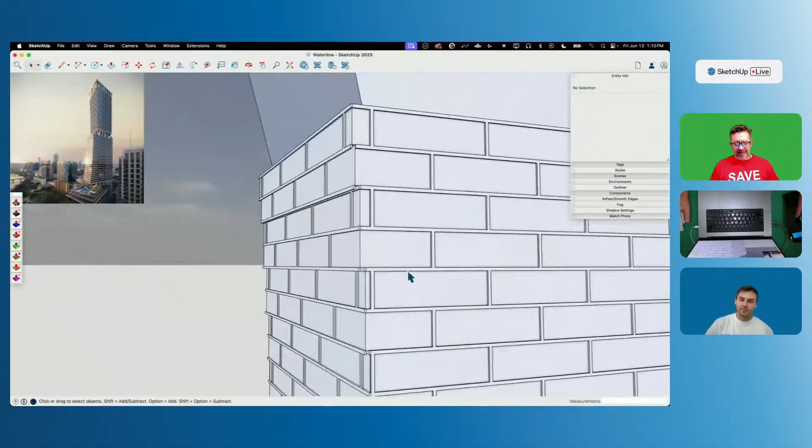All right, so that's pretty close to there. What I might do again, depending on how much cleanup I want to do—there's definitely an argument to be made for what am I making this for, and how much detail I want to put on here. That looks pretty cool the way it is. If I did want to get these as a solid piece, I could do a little bit more work, things like coming in here, pulling these higher.

Why does that not come out? That should come out to here. Yeah, but that's tedious. I think it's important to remember that this is a 2-hour stream, not a 14-hour streaming marathon. Right, no, yeah, absolutely.

So there's a little bit of cleanup that could be done there. That's only a couple actually, so maybe it's not too bad to just—why does that not come out either? Oh, I did these top ones, I didn't do right. This is gonna bug me. Every once in a while I'll get done with a model, be like, whew, good job, got through that thing, and then I'll have to go back and make some changes because something I did didn't sit right with me.

So you're up late at night just brooding over it. Or sometimes Monday morning, because my routine's kind of like I come in, in the morning, sit down on my computer in my office, have my coffee, look for things, just look at emails or whatever came in.

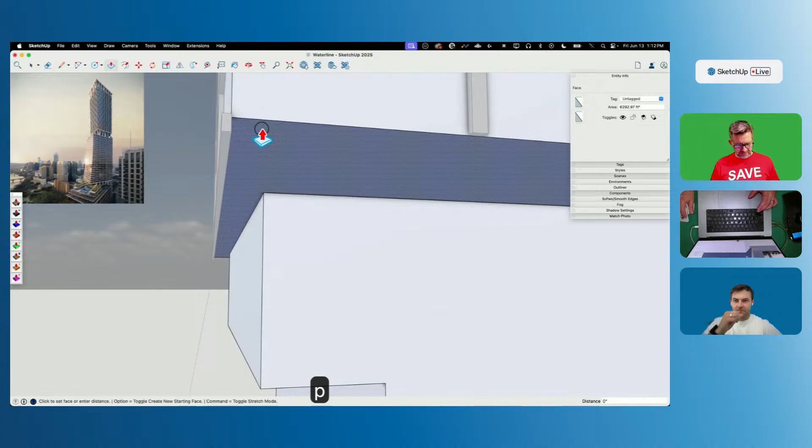I like that, I think that looks good. One thing, this right here, I might have to come do something about. So this one ended up hanging down, which makes sense, and then these ones didn't. So I might come down here, grab this option, bring that down, and then bring each of these edges out just to match that look and feel.

It kind of looks like in the Waterline that you have there, to the left at the bottom of that section of the tower, it kind of has a bigger piece that jets out. So maybe you could offset that bottom plane and really push it out. Maybe we just pull this down like... yeah, there you go. Again, they wouldn't give me architectural, so it's on them if they don't like it.

Like somebody somewhere is expecting something out of this. Whoops.

All right. Cool. All right. Yeah, that looks pretty sweet. Hour and 15 minutes into it, and I think the bones are there. It's looking good. It's not nothing.

All right, here's what I think I'm going to do. I want to start making the... so here's the thing that I want to do more of in '25, and that is model with good looking textures.

You guys know if you've been watching for any amount of time, I'm a big fan of just like that white clay model. I think that's why I liked ambient occlusion so much. But working on such a big building, ambient occlusion isn't going to have much impact on it, because we're modeling true to life, and an ambient shadow on something that's 1,000 feet tall is going to be almost imperceptible from this far out.

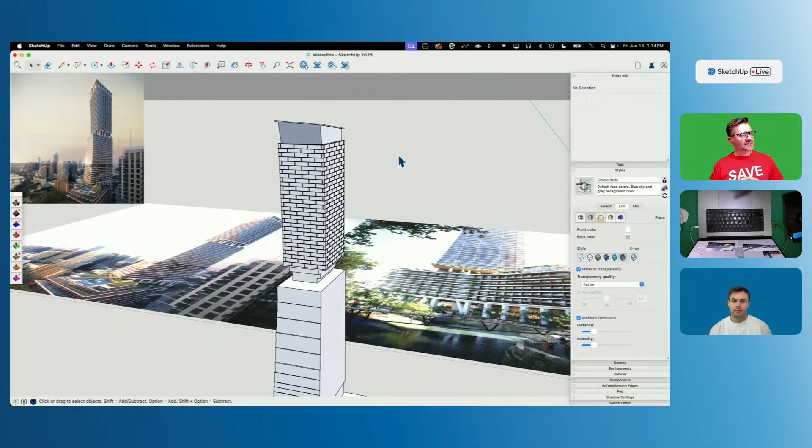But I did like doing models in just white, just letting the geometry do its thing. But man, after doing a couple of modeling sessions with good looking materials and lighting and everything, I'm like, I got to just do this, I got to do this a lot more. So I'm going to do that right now. I'm going to get a shiny blue glassy material. I'm not really worried, I don't want to mess with transparency. I don't need to see inside the building, I know there's nothing inside there, but I do want to get something reflective, that bounces this blue light off of it, kind of thing going on.

So I'm going to come in right now, before I go any further, we're going to come in here to look at, maybe we can try a metal. Let's start with the metal.

Yeah, I feel like sometimes too, if you're always modeling with just a purely white model, it can somewhat be discouraging to keep pushing, but then as soon as you get some nice textures on there, you're like, ah, I see how this is starting to come together. Look at how reflective that is. It's just inspiring by itself, you know? So that looks pretty cool, like that already, it's already coming together just that much.

And I think if I was to go a little bit further and get rid of my edges, so see that... yeah, there we go. That looks better, I like that.

I like that. I got to do a little bit of work because I modeled... I just turned the whole thing. Come in here, grab that section all the way around, put the default material back on that. Oh, it already has that. Okay, this is a thing I did which you're not supposed to ever do, and I colored the outside. So let's try that again.

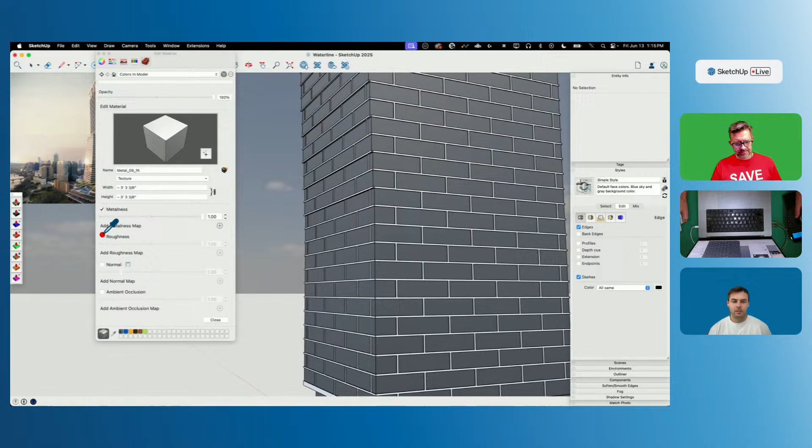Oops, I undid that. All right.

All right, what did I do now? I colored on the outside again. All right, let's try this. Turn it back to white. Come into context, Command A. Put my silver on here. Now I want this to be white. And I want this to be white. There we go. All right, that's getting us closer to what I want.

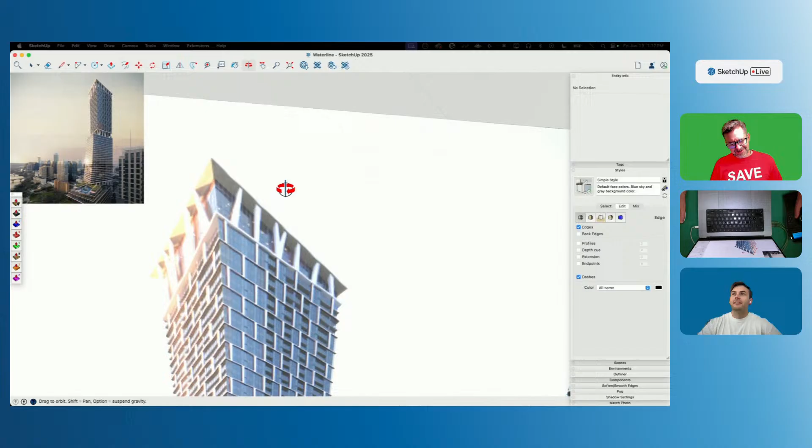All right, so here's what we're gonna do. I'm just gonna come up here and start with rectangles. I'm gonna keep this simple. One here, and then the last one is right down here. The bases look like they're fairly evenly distributed. So 1, 2, 3, 4.

Okay, so I'm gonna take this one, push it up. I'm just gonna go straight up for right now, and then I'll grab it, and it looks like it kind of tilts back this way a little bit. Actually, let me undo that. I'm gonna grab this, make it a group.

It does look like it gets smaller, so I'm gonna grab this. I'm gonna scale, make it smaller on the top, and then maybe slide it back a little bit. Yeah, see, that kind of leaning thing. This one looks like it just goes straight up.

Next one is a V. So I'm going to make that group. All right, so this one, I'm going to bring up like that. Get in there. There we go. All right, I'm going to make that a group. Edit that, same thing. Make it a group. All right.

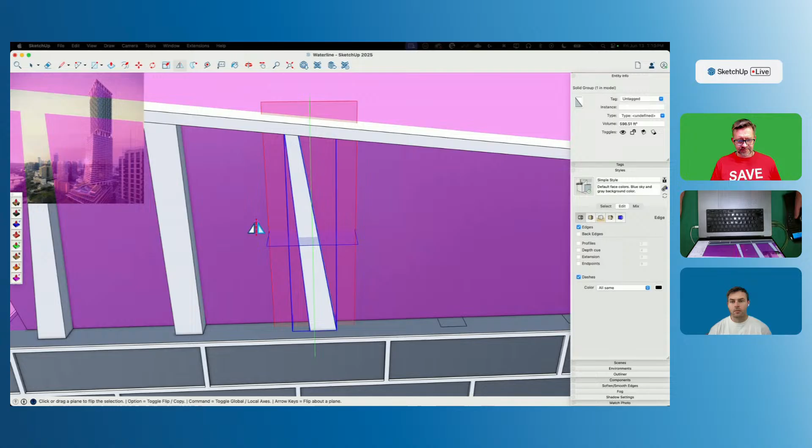And then same thing, I'm going to grab this and slide it back. And I'm going to grab it and slide it over like that. And then I'm going to grab this and see if this works, see how simple I can keep this. I'm going to option copy that to about the middle. Not too bad. All right, so I'm going to grab both of those.

Tools, outer shell, which has become my favorite. I use that so much more now than I ever have before. It's nice. Looks like you got a little bit poking out the roof there, but easy fix, I can just grab that, lower it just a skosh.

That's a design term, 'just a skosh.' Do you remember? Was skosh used a lot in schooling for you? No, no, we used much more vulgar terms as we were sitting there frustrated in architecture studio for the sixth hour in a row.

What year did you graduate from architecture school, Justin? 2014. And in 2014, how much of your work was hand drawing versus computer drafting? We did some hand drafting, just for the nostalgic element, but I'd say most of it was all on the computer. Spent a lot of time in SketchUp, and a lot of time in Photoshop. And if only I knew about LayOut at that time.

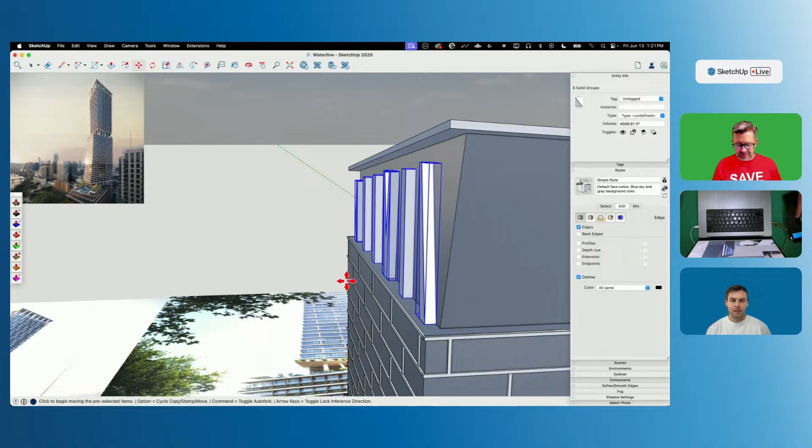Fair, fair, yeah, it was funny. That was actually a sentiment which I think we get a lot, but when I talked to people in Denver this week, a lot of people don't use that much LayOut, and as soon as you go in there and start seeing other people using it, you start to get your eyes open and go, 'Wait a minute, I could be doing all this.'

100%. I've been working on a couple projects this week, and have been spending a lot of time in LayOut, and I gotta say, sometimes it's a joy just to work in that capacity and see things kind of 2D. Kind of reminds me a lot of putting together IKEA manuals or something like that, and I love that aesthetic. Yes, yeah, it's a great tool to use, and I wish I had it in architecture school.

I think one of the things that I find so gratifying about it is it's great to get in SketchUp and take something in my imagination and make it real, or make it look like a thing. But there's something else to taking it and going, okay, now it's out of SketchUp and looking at it as a thing. I think that's super satisfying, to take it to that next level.

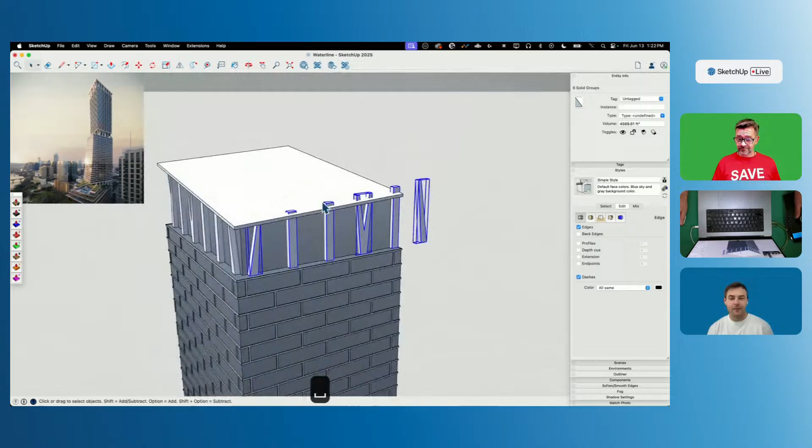Yeah, and also, if you're drawing things by hand and you decide, or the client decides, that you want a change to the design somehow, you're not spending hours and hours redrawing that elevation. You can just make the model change and then update the model reference, and bada bing, bada boom, it's done. I like that a lot. What you're saying makes sense.

But yeah, I definitely sync with that IKEA thing because I'm a big fan of trying to make things as simple and understandable as possible. I like to think I'm pretty good at it, and taking that across to making some kind of assembly or shop drawings for something. I like that challenge, and I like when I can deliver on that. I think that feels pretty cool.

Yeah, for sure. Speaking of making things look easy, I feel like you've made light work of these columns. Yeah, I'm kind of just rushing towards the finish here, taking the easy way out a little bit. I don't know that these are very super accurate, but I think they're getting the point across. So for this, one thing I'm going to have to do... whoops, that's not right. There we go.

I want to get these ones leaning out, so we'll take them like that, and then we'll scale them one at a time. There we go. Get them up, and all I want to do is just get that top end buried in there. I'm curious, I wasn't sure if I'd have to make the top a little bit taller to hide those discrepancies.

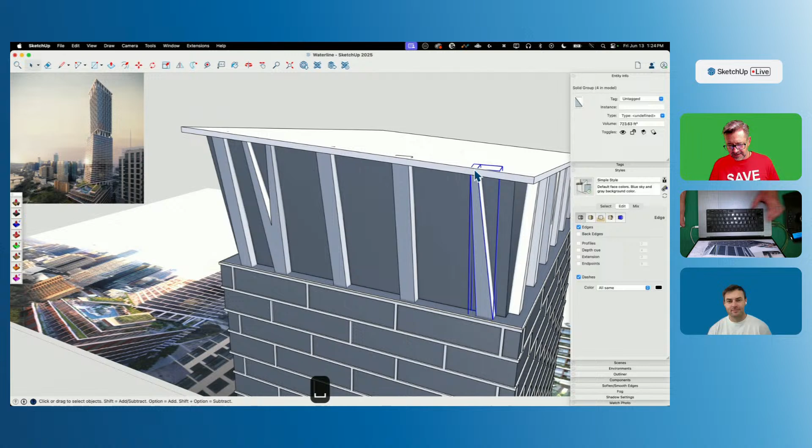But I think I can even use these same sets of columns down on the first floor. So we'll grab that. I used joint push-pull the first time because, like I said, it was angled like this, but I wanted to push-pull it up this way. Now that this is its own face, I can just grab, move, and move it vertically. I don't have to use push-pull again. I can just do it that way, and that looks solid.

I like that. Don't forget to save, all right. No, I'm kidding. That's a great idea. That was good thinking, all right.

So it looks like down here we have vertical, vertical. We got a V, a vertical, and a V. So vertical, vertical, V, vertical. I'll grab those, and then we're just going to go from this face, options straight down, plunk them right there. And now we'll move them around. They're different sizes, but I think that's going to be okay too.

Let's drag them back this way. I'll start at the corner. This one looks like it's maybe like here-ish based on that grid. My grid's a little different. I'll go like that, and then we'll grab this and go like this. And then we got another V down here on the end. Oh, come on, there we go.

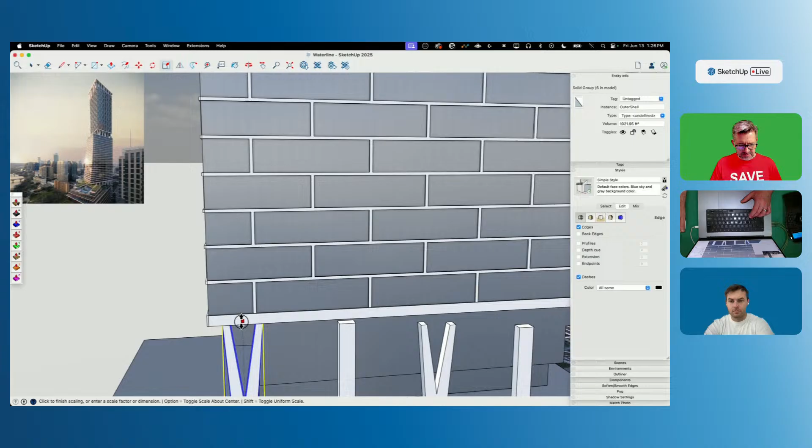All right, and these are all the same size, so this will make it a little bit easier to put them around the edges because I can grab this one, stretch it up into here. Actually, not even up into here, I don't have to bury it in the plane. I can actually just snap the top. Oh, no, I can't, I got to go up higher than that because I got an uneven situation right here. There we go, got an architectural situation here. That's right, we got a design situation happening.

All right, cool. Hey, I got a question for everyone joining us from wherever they're joining us. I like to ask this: anybody got any good movies they've seen recently? I just went this week and saw Ballerina, the new John Wick movie, and it was pretty fun. Nice. It was not deep, there was not a whole lot going on. It was a John Wick movie, violence and loud explosions and things, but it was fun. Simplicity and violence, there's just something so pure. Yeah, here's what you need.

Don't worry about it, go get it. Yeah, that was pretty much it.

It was definitely a fun movie to sit and watch if you like that sort of thing. I feel like there's a lot of decent movies coming out recently. The summer's going to be good. I'm excited for some stuff coming out. Yeah, what are you looking forward to?

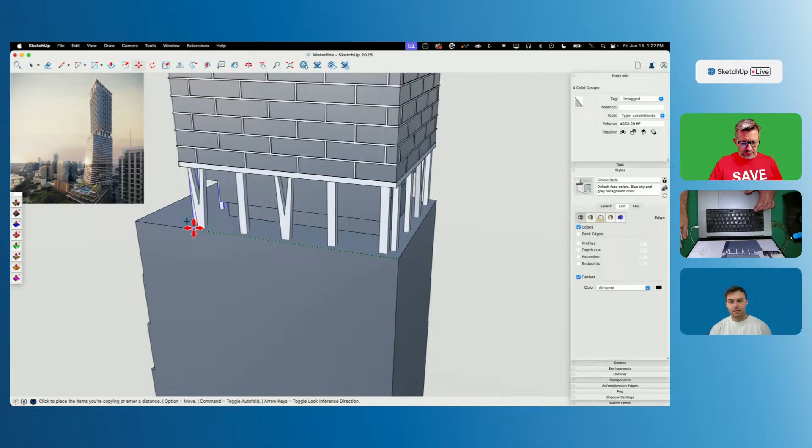Well, as a fan of superhero movies, I've got a Marvel movie coming out, the Fantastic Four, which I think is going to be a fun one. And then new Superman, new Man of Steel, new director, writer, everything. So that's going to be interesting as well, but it should be fun.

I like those movies where I get to suspend belief. And when you go to those movies, are you getting popcorn or sneaking in snacks? What's your go-to?

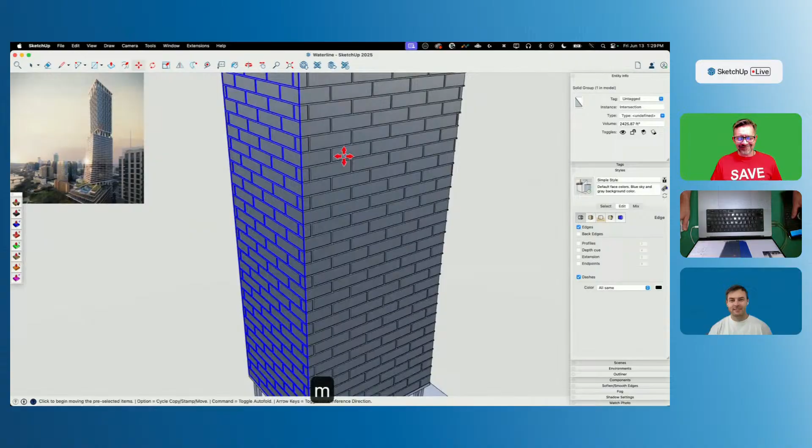I had a bit of a moral issue. My daughter worked at the movie theater we go to, and she told me that the franchise makes all the money off the box office — the money you pay for a ticket goes to the franchise, not the brand like Regal or AMC. The local staff gets paid off merchandise and food. So I got to the point where I couldn't sneak in my Junior Mints anymore, I had to buy them there because I felt bad, like I was cheating. Since she told me that last year, I'll either not get anything or buy something there. You gotta do it, even over $10 for popcorn. Well, I get 10% off because I'm a member, so that offsets something.

So far in the chat, we've got 2 additional votes for John Wick. So if you're into action movies, that seems to be the one to watch.

It was definitely fun, that's for sure. I haven't seen the latest one, but I saw the first, maybe 2 or 3. What can't you say about Keanu Reeves? What a guy. I always hear too that he's just a really nice guy, and that goes a long way for me.

I don't want to say there are actors I've enjoyed less after learning they're kind of turds, but it's not totally untrue. So it's cool to hear he's a very nice human. Just a genuinely nice guy, which is at odds with the fact that he's a killing machine in these movies. There's definitely something to be said about his character and the total lack of empathy when he does what he does.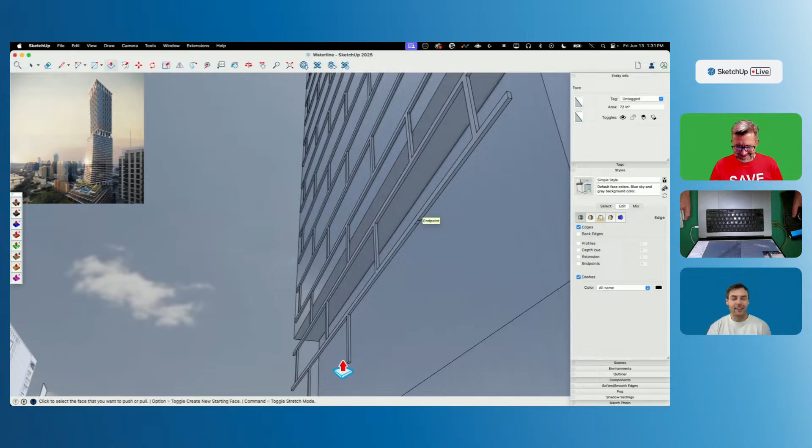Plus, I was raised by parents who thought it was a good idea to show me crazy movies early on in my life, and the Matrix was one of the first movies I ever saw, so I have a soft spot for Keanu Reeves in general. I could see that, very much. They were like, 'Hey, I know you're only 8 years old, but you should question everything.' I love that, that's perfect.

All right, I need to count something again. 1, 2, 3, 4, 5, 6, 7, 8, 9, 10, 11, 12, 13, 14, 15, 16, 17, 18, 19, 20, 21, 22, 23, 24, 25, 26, 27, 28, 29, 30. Dang it. 1, 2, 3, 4, 5. Too many. 1, 2, 3, 4, 5. Wait, so all I had to do was grab this.

Not to rub salt in the wound, but a little bit of prep would have been slightly advisable, because there are some diagrams that people have shared in the forum here. I should pay attention to that, specifically how many floors there are. The top one has 33 floors, and the bottom section has 26. I see that, but...

Good times, good times. What did I do here though? 1, 2, 3, 4, 5, 6, 7, 8, 9, 10, 11, 12, 13, 14, 15, 16, 17, 18, 19, 20, 21, 22, 23, 24, 25. It's pretty close. 26. I was not that far off.

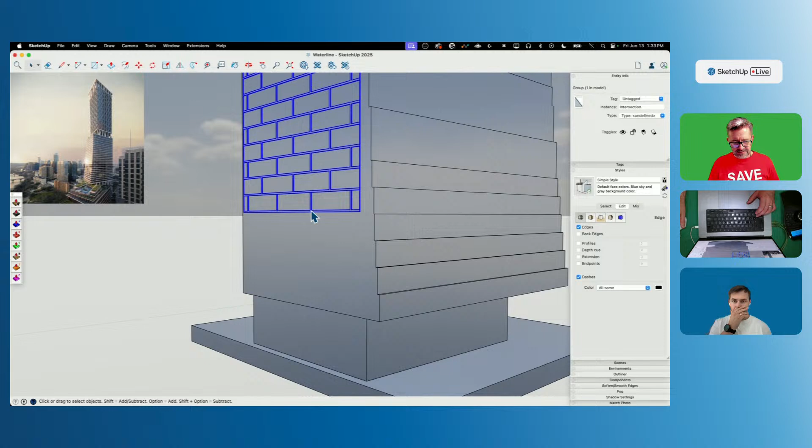So what I want to do then is go 1, 2, 3, 4, 5, and come across here. Delete, delete, push pull this back till it goes away, and then take that. In theory, if I take this down here to here, those breaks should line up. It actually lines up perfect. Look at those. That's how you know you're a pro. Or just lucky. I'll take luck, man.

All right, I'm going to cut a couple of corners here because I appreciate very much the people who shared in the forum - thank you. You're awesome, and I'm not disregarding it, I'm just conscious that I've got about 20 minutes left to finish whatever I'm going to finish, and I want to get something on the base here.

We're doing it for the thumbnail here, folks. There's a point where it's just about that. So I'm going to option copy this to here. Maybe I should just do two sides because you can't see the whole thing in the thumbnail anyhow. All right, that's a little too much, taking it a little too far.

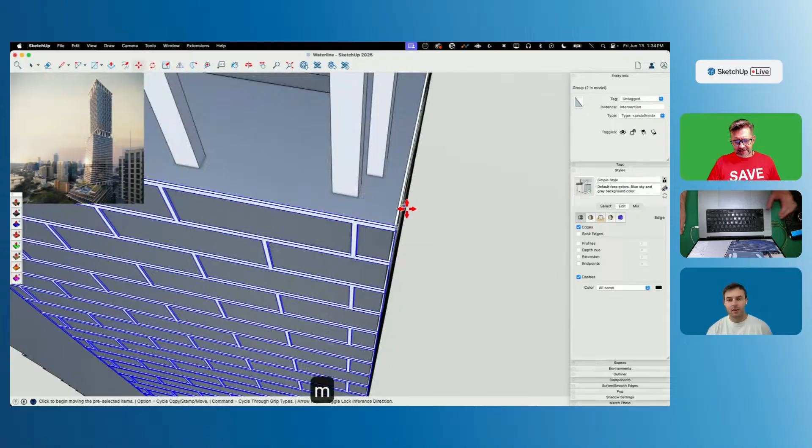We're getting desperate now. All right, I don't want to distort it this way too much, even though it does kind of look like it stretches out there. So duplicate it in the outer shell - I think I'm going to grab this by this corner here and option copy that to there. Those two will work.

I don't know what it is about solid tools. I think solid tools used to be less dependable than they are now, but I do get scared occasionally of using solid tools. All right, so let's...

So when you get this error with solid tools that something isn't playing ball, is your go-to approach to use Solid Inspector? It is. Well, usually what I'll do - and this could have been fixed - is take a look at it in 3D real quick, and I would have noticed that there's no back on this at all.

Big, that's an issue, oh man. All right, let's see if I can fix this. Easy fix is intersect with selection. Let it break those. That doesn't always work, but sometimes it does, and it did, and it's good. All right, so I'm just going to do this once to this one piece, delete the other copy I made, and then just recopy this.

I feel like that's the nature of the beast when modeling these skyscrapers - there's a lot of tedious manual tasks that you have to do. Because you're either looking at repeating stuff, or you're looking at stuff that almost repeats and is slightly different each time it goes up, which feels like a recurring thing.

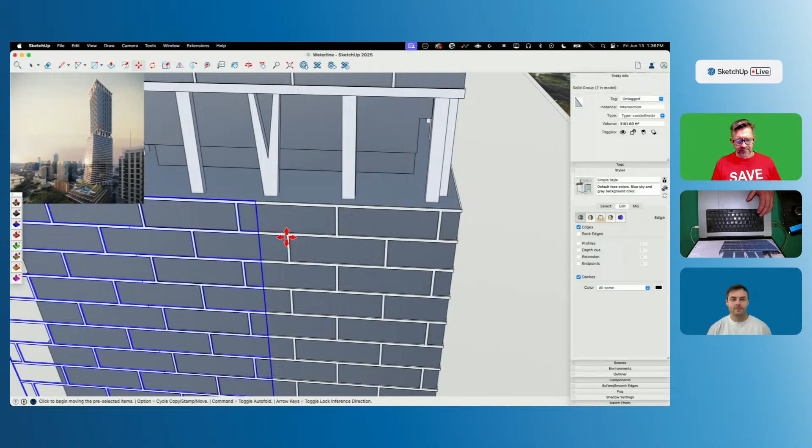How do you move around so smoothly? I figured this is a good opportunity to plug 3Dconnexion. If you look at the overhead camera, just off screen, you can see this thing I'm putting my hand on - this is a 3D mouse, specifically the SpaceMouse Enterprise from 3Dconnexion. It allows me to move the camera around the model as if I had a scale version of that model in my hand. So you twist it this way, I could twist it this way, and it just makes moving quicker and easier. We all get used to, as SketchUp users, doing this kind of thing, which is awesome - it's a wonderful way to navigate in 3D space. I love it, but not having to use that mouse at all to move in 3D space, so I have reserved this. I can do things like clean up my UI.

I can grab the next tool that I'm going to use, all while I'm moving around 3D space. Plus, for presentation, this looks so much nicer than this. That's how it would be if I was streaming, actually. You guys would all probably get motion sick.

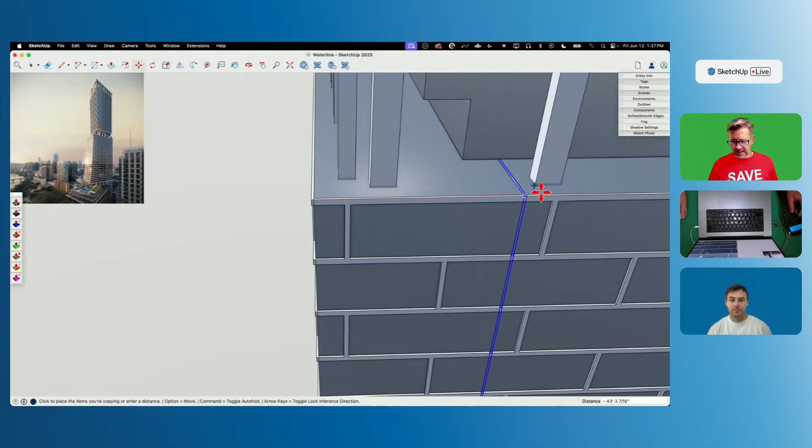All right, so now we are again at that point where I got to figure out how to best, quickest, easiest chop this thing up. I got to do this on two pieces, but then I also got to carry this through. So before I do anything, I'm gonna grab this option and copy this over to here. I know it's gonna go into the building, and that's fine. And I'm gonna grab this one right here.

I was talking about how originally I was thinking about using intersect and then some joint push pull kind of stuff. I'm kind of wondering if that would still work. I wouldn't be able to maintain my separate pieces for the white sections from the silver sections, but I could, in theory, intersect with the model and then pull those pieces back out. Kind of sounds like a fun thing to try, right?

Yeah. Here's what I'm going to do. In the final hour, let's do something destructive. That's right, what could go wrong? But see, I've learned enough to go... there you go, thanks Tyson. I'm going to break it all. No problem. All right, so actually, here I'm going to do that twice real quick because I'm going to do bad things. All right, I'm going to just take this one.

I'm going to scale this. Actually, grab this, scale it, and I want to make it very deep like that. And I'm going to bring it in like this. And now I'm going to come in here. I'm going to grab just this face. I'm going to right click. I'm going to say intersect face with model. And that should give me a beautiful grid pattern.

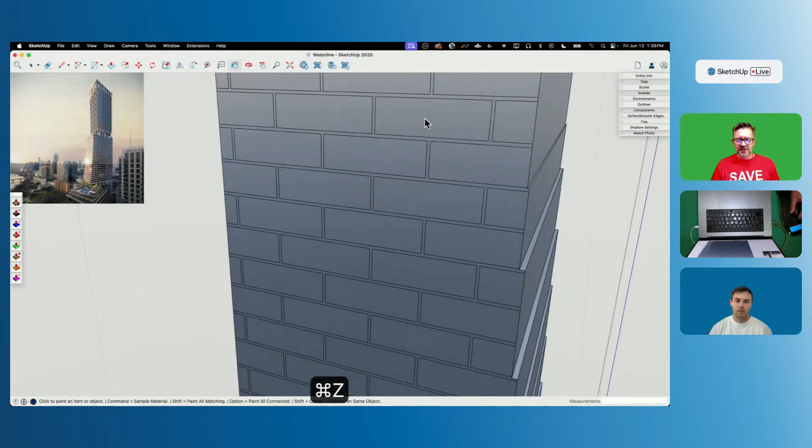Now, if while I'm in here, I'm in the geometry and I click - where's my colors? There we go. I color white right here. Oh man.

Let me try again. We'll just do exactly what we did before. All right, there we go. Should I do it more than once for some reason? All right, so now I should be able to delete this and come in here. I can color just this like that, and then I can pull it out 6 inches. There you go, that's it.

They're white, they stick off the same amount as the other pieces on the outside. All right, this could work. Let's see. I'll take this one, same thing. I'm going to grab it. Grab this, scale it, make it ridiculously big, bring it in here.

This one's going to be a little bit different because when I come in here, what I'll have to do is grab each of these faces - one, two, three, four. Still, it's not going to be difficult. It's quicker than what I would have to do as a separate piece. Right click, intersect face with model, and then see if I can come in - nope, I have to do the same thing again. Grab that. Not quite sure why that's happening.

That's an interesting one. Yeah, to be fair, I thought that this approach you're taking now, of just building the mesh and then intersecting everything, was what you were going to do. But then you gave us all the visual treat of doing it the hard way, the long way. So you got to see it both ways, folks.

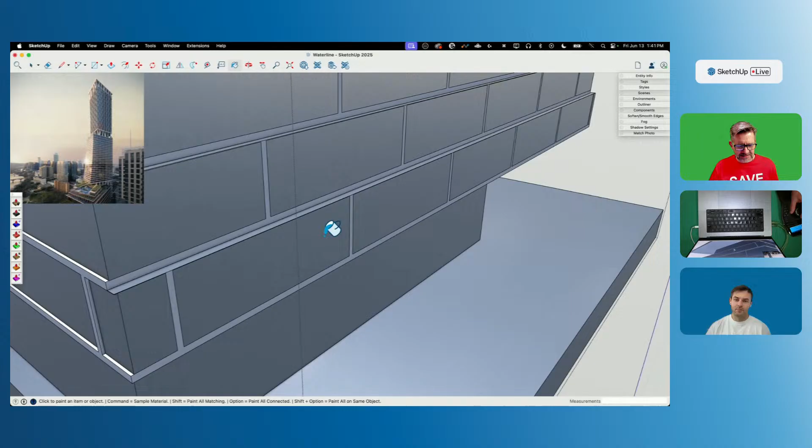So if I come in here, I'm going to grab this one, pull it out 6, and now I can just cruise right up the building, double click, double click. That's one of the most helpful things I've learned in the last decade of using SketchUp - just the double click. And it works for offset too. Yeah, it's kind of nice.

All right, there we go. We have 18 minutes to go here, but it's really coming together. This is showing up. I like this, I was genuinely okay with it.

I want to call this out because it's by design, very intentional. Let me show you the problem that could have happened. If I grab this, right click, intersect face with model, it'll break it up, and for whatever reason it's an interior face. I'll just do it again, right click, intersect face with model. Now we have all these separate pieces.

If I came in here, and I was talking about merging this face earlier, if I had just pulled this out like this, now to come in and color this would be, in a word, painful. Because what I'd probably do is grab all of it, color it all white, and then manually come back and color each window back with the silver.

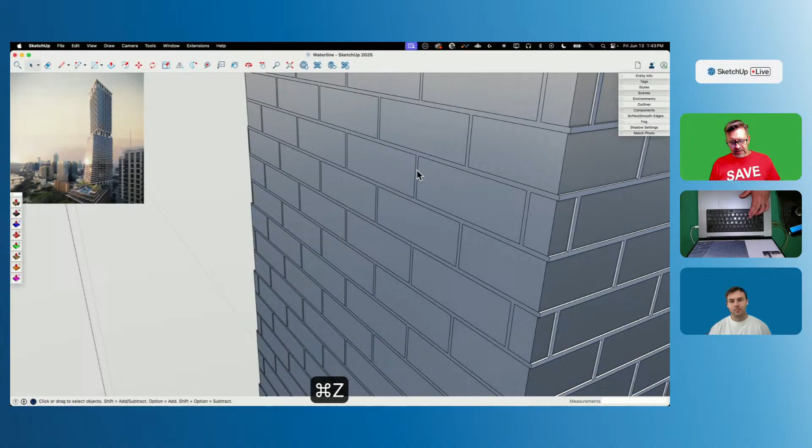So it's super important if you have a situation like this where you're going to add depth. This doesn't have to be complex like this, it could be window sills on a residence, or trim, something like that. If you color it when it's flat, so I put my white in here when it's flat, now when I pull it out, the new faces that come out are already colored the same as the faces. Huge time saver, and that's what I was trying to avoid because I didn't want to end up clicking 500 times to color that in.

That's a good call out. Always, when things are 2D on a flat plane, that is the time to add materials if you're going to add depth to it, like windows or skyscrapers even, anything theoretically.

All right, this one's similar to that last piece. I just have to grab all the face pieces. I think there's fewer faces here. One, two, three, four, five, six, seven, eight, nine, ten, eleven, twelve... Friday the 13th. Just intersect face with model.

And then any of these faces that didn't break, I'm just guessing, clicking down here to see what happened. It's kind of like Minesweeper or something. Looks like a lot of these worked out well, they didn't have issues. I like it.

All right, so just some of these at the top, right click, intersect face with model. Break those. Now just grab each of these 13 sections.

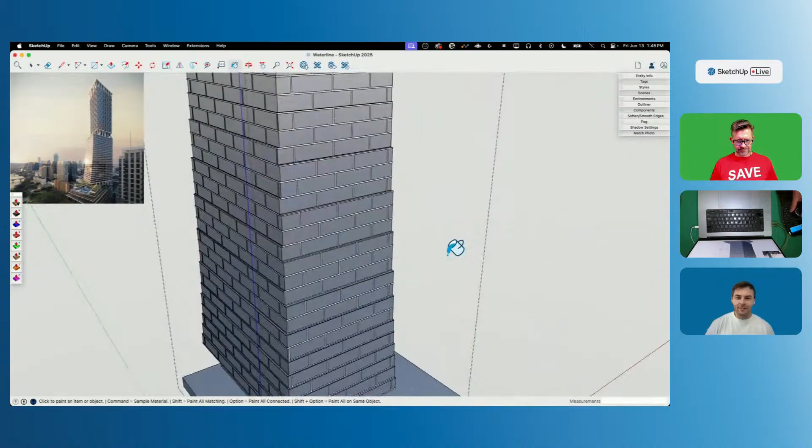Did you even realize it was Friday the 13th? I didn't even think about that. That is spooky. I've already modeled Jason's mask from the Friday the 13th movies, that was a while ago. Yeah, I don't know, we could have modeled something, we've already done so much of that stuff, haunted houses, I don't know. What does bad luck look like in a model? I think next time we just gotta model the unseen 13th floor of a skyscraper, and it could be anything we want it to be. That's true.

Pulls out 6 inches, and I'm just going to do the same thing I did before. Now just double click, double click. You never guess what's next, double click, double click, double click, double click, double click, there we go.

Yeah, the good old double click. There we go, all right, and now we get rid of this piece. I feel good, I feel comfortable getting rid of these extras. I feel good about where we ended up.

I think you should save. Just saying. Sure, sure, suppose. All right.

Last thing I'm going to do is grab some of these columns because it looks like we do have a leaning one.

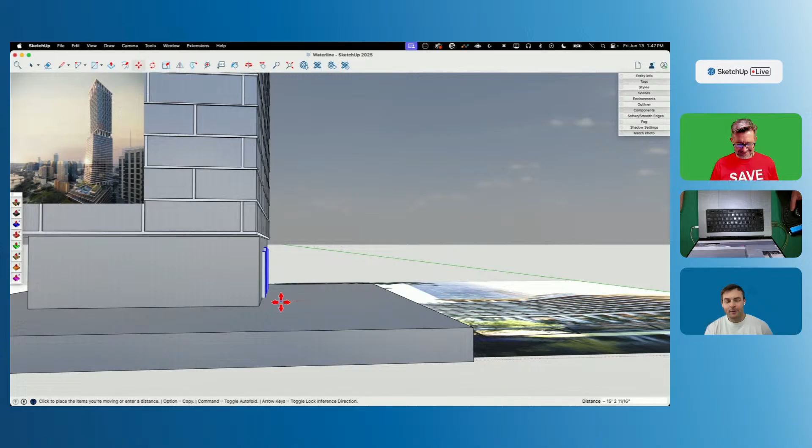I think this is going to conclude our session. And we're just pretending like the bottom half that juts out of the building doesn't exist. This is purely a focus on the top half of the building, a focused modeling session.

But I mean, it shows you, what were you working off? A couple reference photos and a handful of elevations, basically. So the fact that you were able to put this together and the windows look on point, and the columns here look on point, I think you can call it a success. Actually, I think it turned out kind of nice.

I like how that turned out. Yeah, it's fun, it's cool to see what you can do. I mean, I don't think you should go out of your way to get as little information as possible, but you can really put a lot together with not too terribly much. I just think that's awesome.

Plus, we got to learn some cool lessons - double clicking, painting flat surfaces, solid inspector, outer shell, intersection of faces. There's a lot of good stuff in today's stream. It really was.

Make that bigger, and then cover up that bottom part. There we go. And even creating geometry specifically for the purposes of covering up other geometry, that is super helpful as well. Not everything has to be real. Yeah, those columns go into the ground too in real life, but this is not a structural model. This is not Tekla.

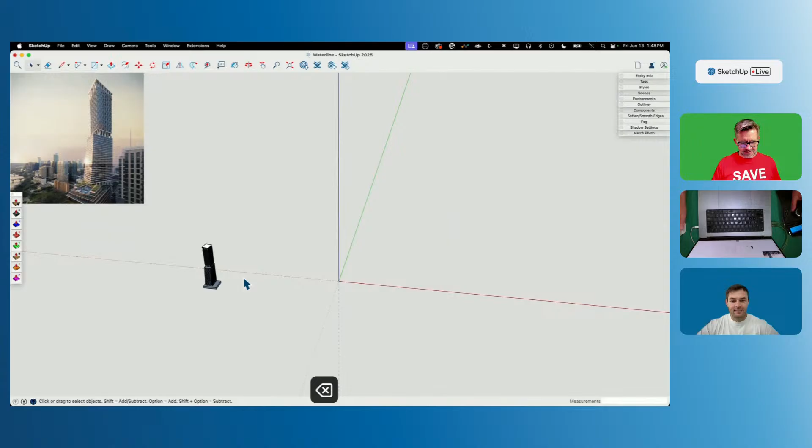All right, there we go. Look, I think that turned out pretty sweet. I'm gonna go get rid of my backups. I'm gonna slide this right over to me. Hey, hold this for me. There we go, right there. Just drop that. There you go. Look at that. Yeah, that looks cool. All right, thanks.

Thank you to Matt for spotting this and thinking that would be a good thing for Aaron to model. I appreciate that. Yeah, this is a fun one.

Thank you guys for hanging out with us and watching us get through here. It's a little bit of a bummer - it would have been kind of cool to have more detail in the bottom section. Maybe you guys totally may have shared that, but I got to be conscious too of how big a bite I go after when I do these sorts of things.

I love talking about this internally earlier this week - deciding to model this, I think we all kind of looked at the photos here and we were like, oh yeah, this is going to be a piece of cake, no problem. But I think this actually ended up being quite a bit more complicated than we thought. Yeah, there were some subtleties. I'm not even sure, as I look at the arcs and stuff against this, how much of this is fisheye effect. There's obviously some exaggeration of the shapes, but I'm not 100% sure that just those two profiles gave us everything we needed. So, but turned out cool nonetheless.